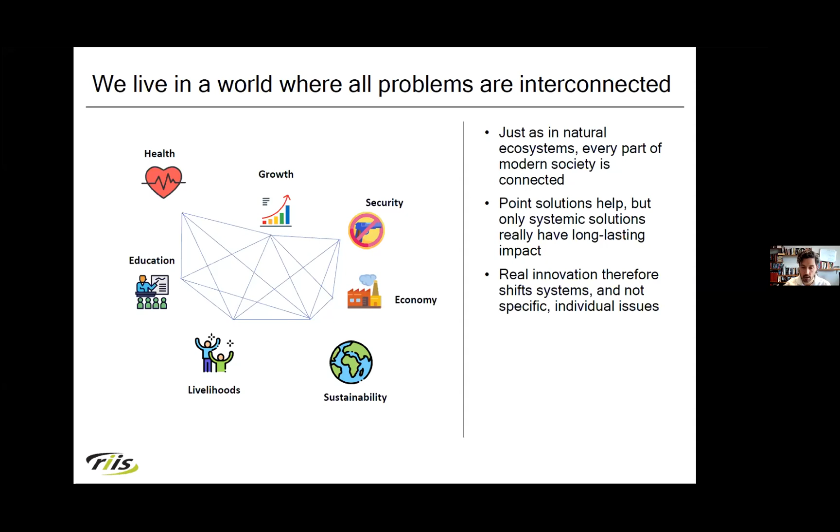Now, one of the challenges that we face when it comes to this question of energy is a kind of triad of problems. As July was saying, we need to balance 3 things. One is there is growth, right? How do we create value for people in South Africa and beyond? And economic growth is very much driven by access to power and access to affordable power. So this is something that we all know. Economic growth, in turn, enables the achievement of better livelihoods.

And it's no surprise, for example, that over the last 25 years, as the well-being and livelihoods of South Africans has increased, that's gone hand in hand with increased access to power, right? It powers education, it powers business, it powers healthcare. And I think one of the things that is sometimes forgotten is that as we move into a kind of fourth industrial revolution, which is a digital technology-driven world, that technology is all based on access to electricity. So the only way that we can continue to achieve this improvement in our well-being and have meaningful positive impact on people is by enabling access to power.

At the same time, we need to balance this with this question of sustainability and ensuring that there is a sustainable, healthy environmental context for the future. And so we have a choice really around where in this triangle we can position ourselves.

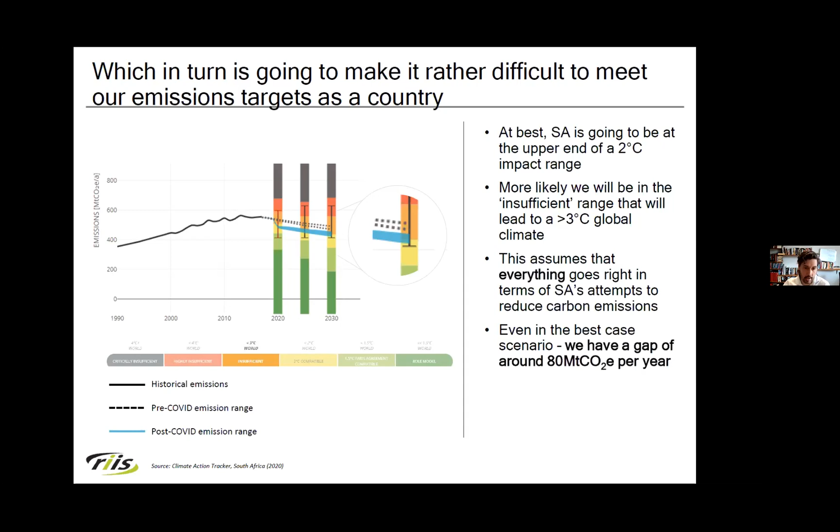So I think one of the first questions to ask is, well, what are the kinds of things that government are doing, and what can be done? So what is the initial effort from the government side? There is quite a lot that's being put forward. The most recent low emission development strategy, produced by the Department of Environment and Energy and issued for consultation at the beginning of this year, really proposed a number of different ideas.

There is a broader wish list, and certainly seeing the economic recovery plan that was recently released by the presidency, there are a number of aspirational wishes about what we want to achieve. There is new hydro capacity of 2,500 megawatts, just shy of 7,000 megawatts of PV, and 16,000 of wind.

There's a range of different energy efficiency programs, many of which have to do with ensuring that the built environment, particularly homes and offices, are much more energy efficient. Mobility programs and the shift towards gas as a fuel source. And then, a range of tax incentives and punitive tax policies, such as the recently imposed carbon tax.

But in as much as there is a wish list for changing this, the reality is that the government has simply not demonstrated a track record of following through on many of these issues. Our history of approving renewable energy is quite low, and given the economic and financial challenges that the country has now and will have over the next couple of years, I think there is a very real question around access to capital, investment capital.

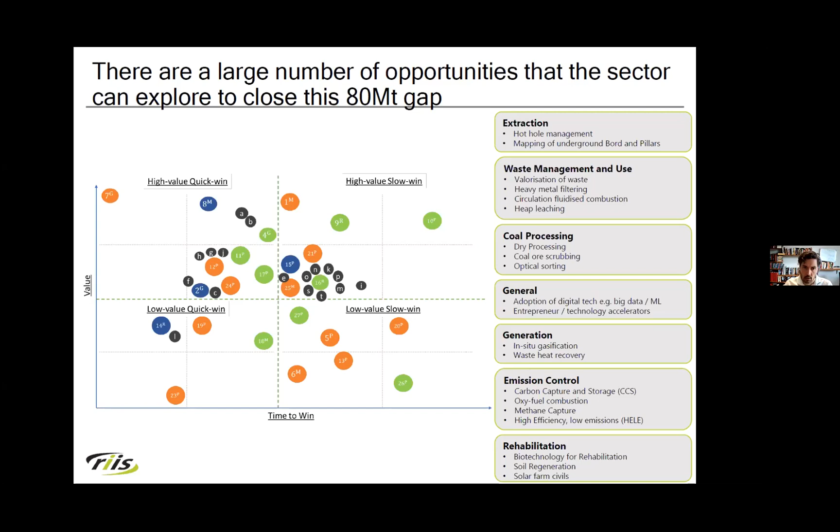So I want to come back then in summary just to this idea of where in the triangle do we want to sit. Certainly the idea that we pursue growth at all costs, at the cost of livelihoods and an environmentally sustainable world, is not something we can pursue.

At the same time, to simply abandon the 53 billion tons of coal sitting in South Africa in pursuit of a 100% green energy mix doesn't make sense, particularly when there are technologies available that would enable us to access that coal more efficiently and cleanly. This really speaks to the point that a diversified energy mix, in which we are constantly investing into newer, more efficient ways of managing our emissions, is really going to be an optimal way of balancing between livelihoods, growth, and sustainability.

So in conclusion, I think there are some large gaps between what we aspire to and what we intend to do — at least 80 megatons of CO2 emissions per year. There are a number of technologies that have been identified that can help close this gap, that can help address not just CO2 but things like water, livelihoods, and a range of other areas.

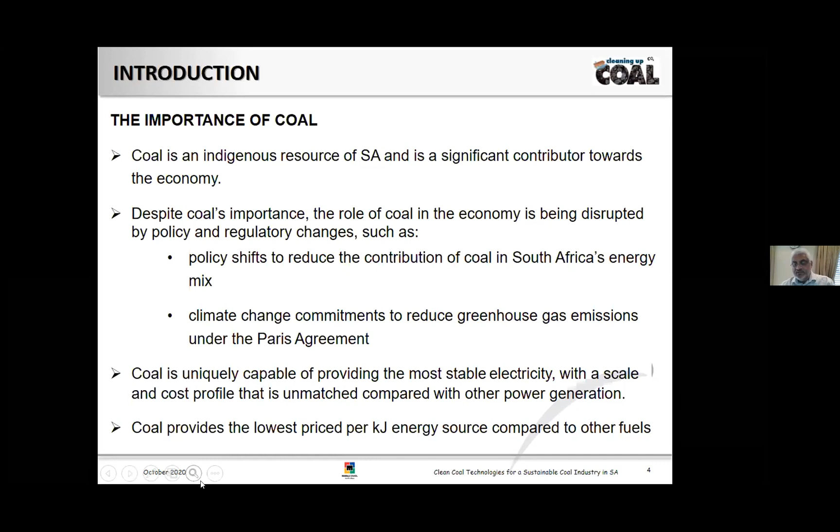Coal is a very complex chemical lattice of carbon, hydrogen, and various elements such as sulfur, nitrogen, mercury, and other trace metals. When combusted, these elements are converted to chemical forms that create pollutants harmful to the environment if not addressed. Extensive research suggests that coal is still crucial for the world and cannot disappear from the energy mix despite being portrayed as a polluting energy source.

Energy and mining companies have been under increasing pressure to curb their emissions. The survival of the coal industry is dependent on promoting the idea of clean coal technology as an energy generation option. So what is clean coal technology?

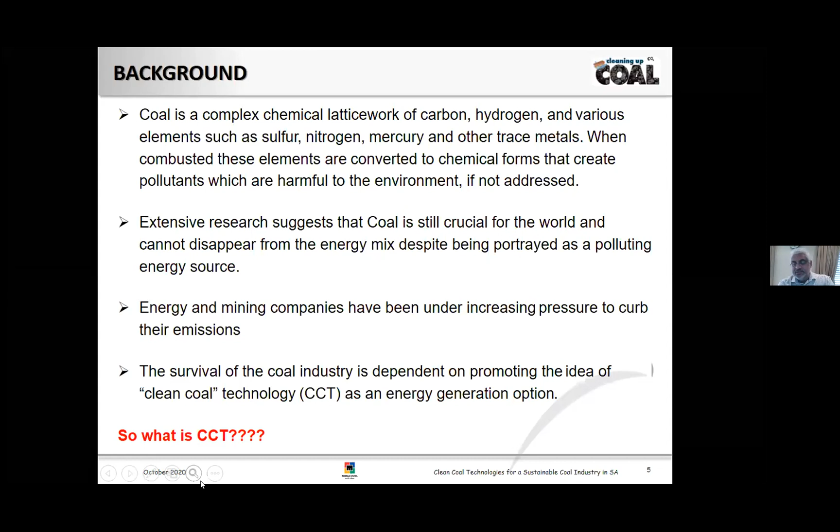Clean coal technology is an umbrella term encompassing a wide array of new generation and advanced technologies designed to enhance both the efficiency and the environmental acceptability of coal in mining, extraction, preparation, and use.

The emissions of concern in the coal value chain are liquid emissions, solid emissions such as ash and waste from coal processing, and gaseous emissions into the atmosphere. Hence, environmental acceptability implies all emissions from the coal value chain that contribute to global climate impacts and health impacts. Due to time constraints, my presentation will concentrate basically on technologies to address gaseous emissions only.

Global warming is not caused by CO2 alone. Rather, global warming is a result of all greenhouse gas emissions. Greenhouse gas emissions is a generic name given for any gas in the atmosphere which absorbs and re-emits heat.

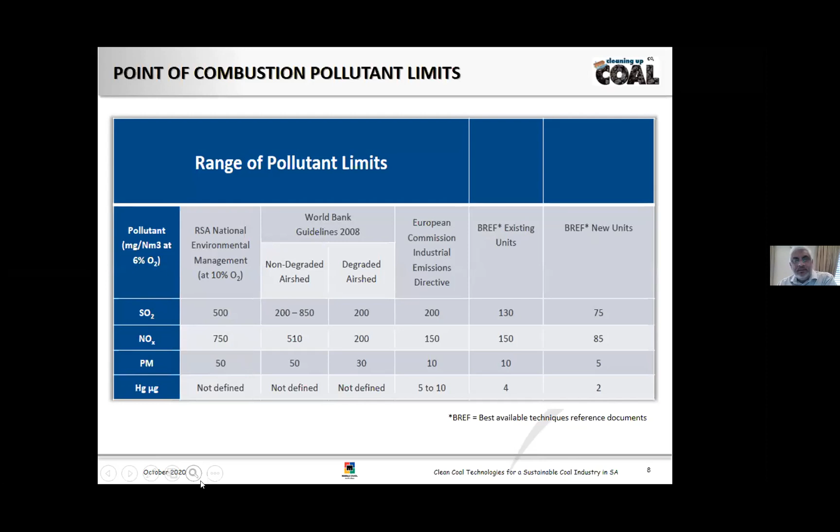The main greenhouse gas emissions of concern are water vapor, carbon dioxide, methane, nitrous oxide, ozone, and fluorinated gases. Note that SO2 is not included in the GHG, but its impact is more health related.

Reading emissions data can be very confusing. Different terms such as greenhouse gases, CO2, CO2 equivalent, and carbon get used in reporting, and at times interchangeably.

Carbon dioxide is a byproduct of the combustion of fossil fuels and living cellular respiration. Carbon dioxide equivalent is a measure used to compare the emissions from various greenhouse gases based upon the global warming potential, reduced to a common base, which is carbon dioxide. For any of the defined greenhouse gases, carbon dioxide equivalent signifies the amount of carbon dioxide which would have the equivalent global warming impact.

Carbon is a chemical element which is present in many gases and compounds. CO2 is not equal to CO2 equivalent, and is not equal to carbon.

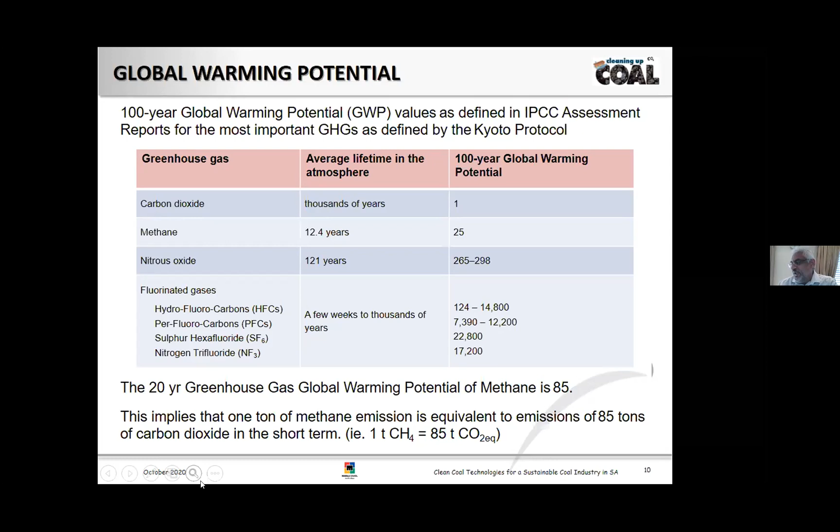Natural gas is widely considered as a viable replacement for coal, as the emission from gas combustion is lower than the emissions from coal at the point of combustion. The drawback with this evaluation is emissions are compared at point of combustion, and only CO2 emissions are taken into consideration. Emissions from smokestacks do not tell the full story.

Concentrating only on point of use emissions will not effectively address climate change, as GHG emissions take place at different stages in the coal value chain, which cumulatively contribute to global climate impact. Each fossil fuel has a different life cycle, and each fossil fuel contributes greenhouse gases at different stages of its life cycle.

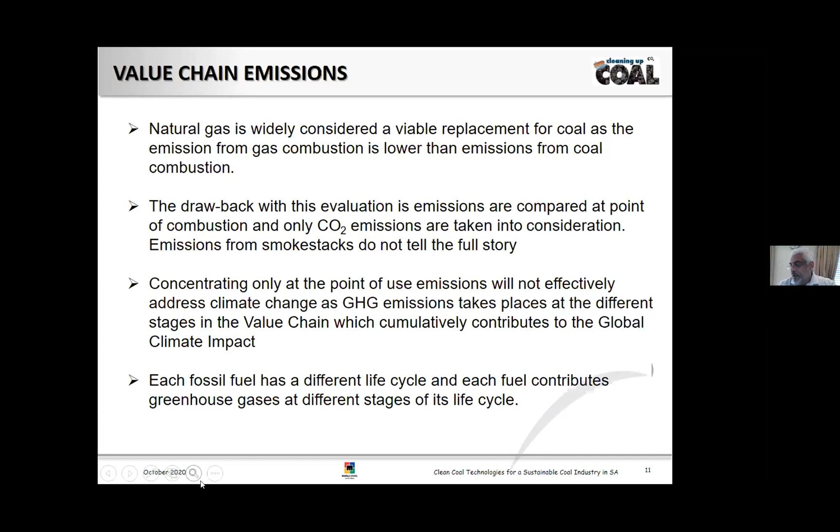If you look at the methane emissions, they are basically due to venting and leaks.

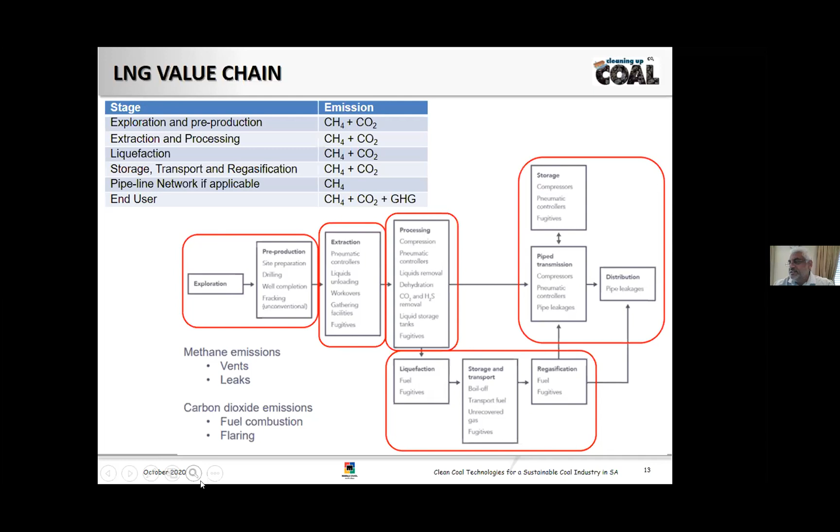We will now look at some technologies that can be used to improve the image of coal.

Climate mitigation interventions pose unique challenges due to the major factors influencing the selection of energy sources, which are energy availability, economics, affordability, and lastly, environmental considerations. Again, to reiterate, GHGs are not emitted only at the point of use. There is a lack of understanding of what contributes to GHG emissions and a lack of awareness of the technologies available for addressing emissions in the coal value chain.

CCTs are perceived to be costly and energy intensive, and hence advocates of renewables believe that fossil fuels should be removed from the energy mix. Coal is competing against gas and renewables for survival, and therefore will require a different way of thinking to enhance its productivity and address climate change concerns simultaneously.

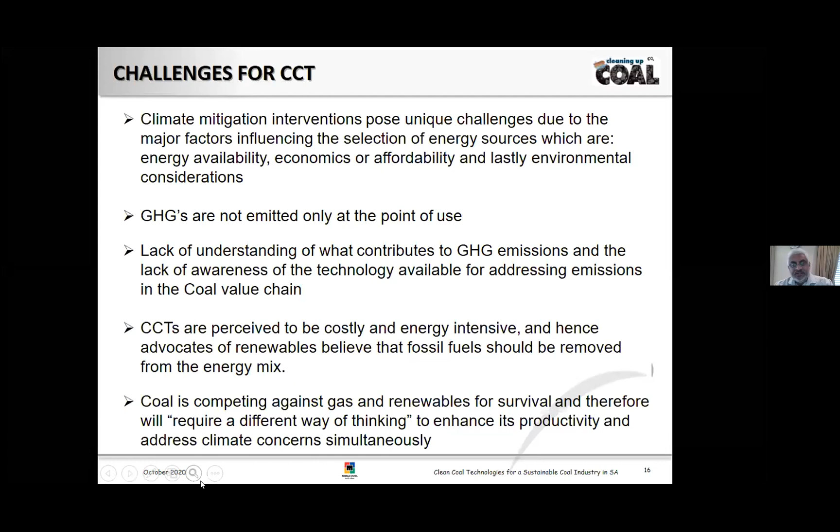To contribute to climate change mitigation, we look at the CCT processes for coal life cycle stages.

Let us look at the first stage of coal mining. Coals are highly heterogeneous and vary widely in quality from mine to mine and even from seam to seam. Coal is normally associated with ash-forming minerals, including sand, rock, and chemical materials, for example organic sulfur, nitrogen, and some mineral salts. Some mineral salts are intermixed in the coal seam or bound organically to the coal, and some are introduced by the mining process.

The cleaner coal technologies that can be employed in the mining process are operational efficiencies through enhanced mining methods, optimal reserve recovery using advanced extraction methods, methane gas capture, and underground coal gasification.

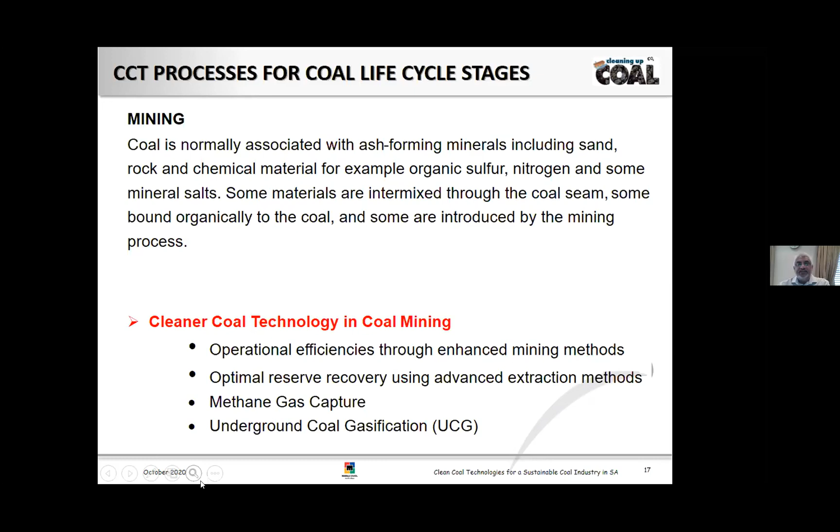Underground coal gasification is an industrial process which converts coal into a product gas. UCG is an in situ gasification process carried out in non-mineable coal seams using injection of oxidants and steam. The predominant gases produced are methane, hydrogen, carbon monoxide, and carbon dioxide.

The cleaner coal technologies in the coal preparation stages could be coal cleaning or coal washing and beneficiation, ultra clean coal, dry waterless cleaning technologies, and coal dehydration technologies.

Coal cleaning and washing at a mine or at the power plant removes ash, rock, and moisture from coal to the extent possible. It reduces emissions of ash and gas emissions such as SOx, NOx, and other byproducts of combustion when the coal is burned.

Ultra clean coal technologies reduce sulfur to a very low level. Also, consistent quality will facilitate stable plant operation and better operating efficiencies.

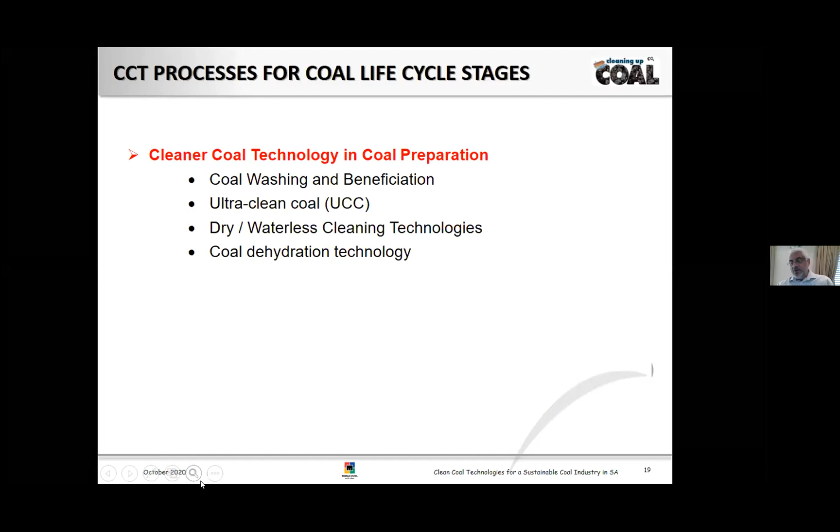Dry cleaning methods such as gravity separators, air tables, and air jigs can also be used when wet washing is not suitable or when washing plants are considered not economically feasible.

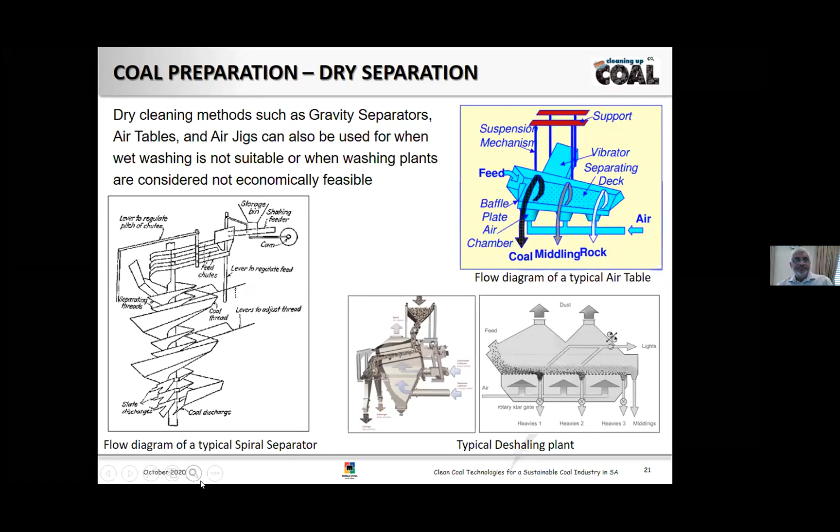Clean Coal Technologies Inc. is developing the first economically viable and scalable coal dehydration technology that creates stable dust-free coal. This technology puts low quality coal through a mild gasification process, removing moisture. Low moisture content improves combustion efficiency.

Clean coal technologies focus on advanced generation and clean coal technologies to advance efficiencies. Improved efficiency increases the power output for a given unit of coal resource. More efficient coal combustion technologies reduce emissions of CO2 and pollutants such as NOx, SOx, and particulates.

Cleaner coal technologies used during combustion include HELE technologies, fluidized bed combustion, integrated gasification combined cycle, pulverized coal, supercritical and ultra supercritical boilers, oxy-fuel combustion, chemical looping combustion, carbonate looping combustion, NOx control processes, advanced control systems, and supercritical CO2-based power generation.

Circulating fluidized bed combustion power generation is considered to be one of the most suitable clean coal technology solutions, as it is the most efficient method to address escalating environmental constraints. It has low NOx capability and furnace sorbent injection for SO2 removal. Also, CFB technology tolerates a wide fuel flexibility and quality variation in the fuel source.

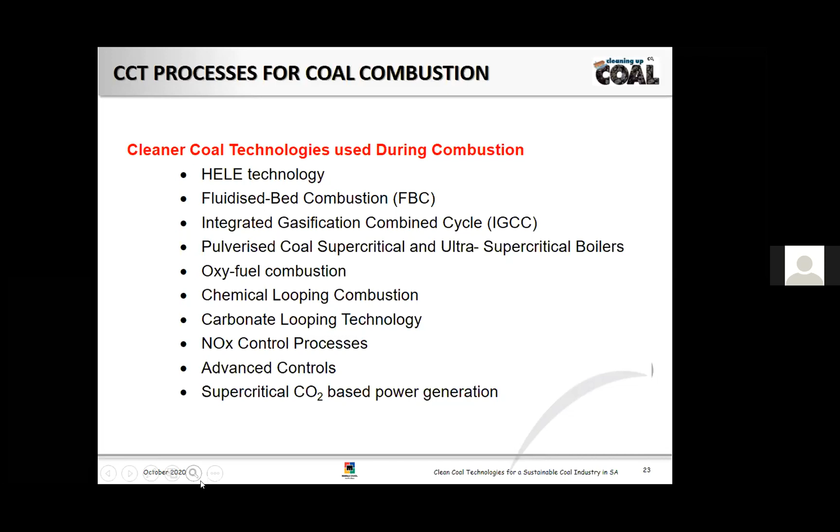We seem to have run into a technical problem. Kirsten, is it possible to sort us out, or is Vinesh back? Yeah, he seemed to have dropped off. Maybe he had an internet connection issue, but I see he's back, so he'll just need to continue. Yeah, you can continue, Vinesh. You can just reshare your screen and continue.

Boiler efficiency is improved from an average of 33% for subcritical technology to 41% for supercritical, 45% for ultra supercritical, and up to 50% for advanced ultra supercritical technology. With the advancement in technology, there is a huge potential for lower emissions through improved efficiencies.

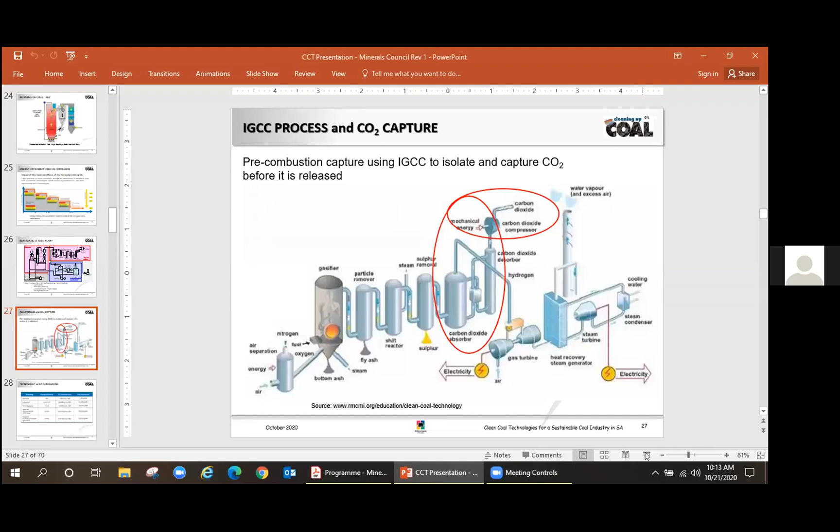So, Vinesh, your slides are not showing. Oh. No, don't seem to be getting back on your screen. Let me try again. Thanks. Go to the slides and go into presentation mode.

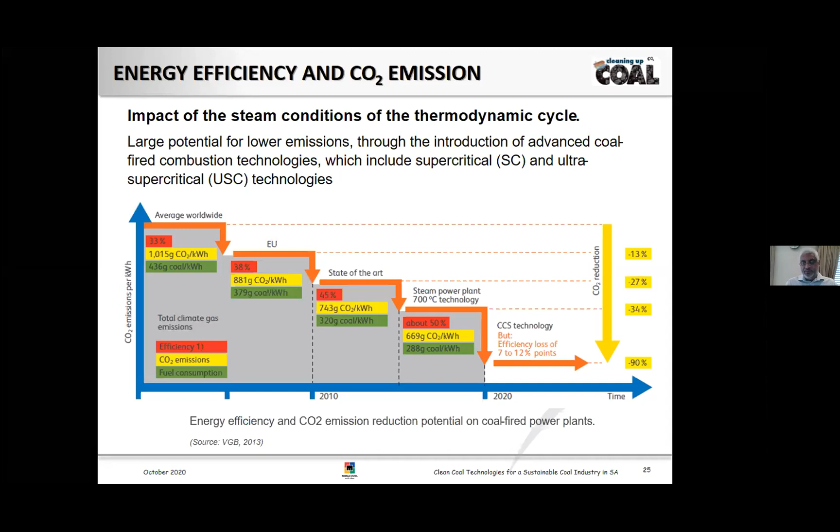This is a schematic diagram of an IGCC plant. The IGCC plant consists of four main operating units: a gasifier, wet gas cleanup, the combined cycle power plant, and the air separation unit.

In comparison to combustion-based technologies, IGCC offers advantages such as increased efficiency from the combined cycle, can be designed to use a wide range of feedstocks, improved environmental performance, and lower cost of cleanup technologies. The cleanup technologies are more compatible with carbon capture and sequestration technologies. It also has saleable products such as slag, sulfur, gypsum, and clean CO2, which becomes a saleable product.

This slide shows you some of the unit operations using the IGCC technology for carbon capture. The carbon capture takes place in the gas cleanup train for the syngas, which is then routed to the gas turbine in the power generation island.

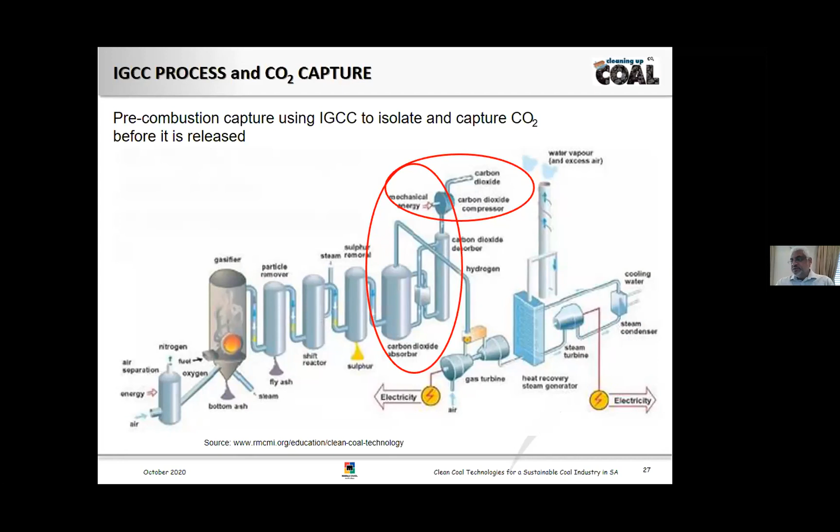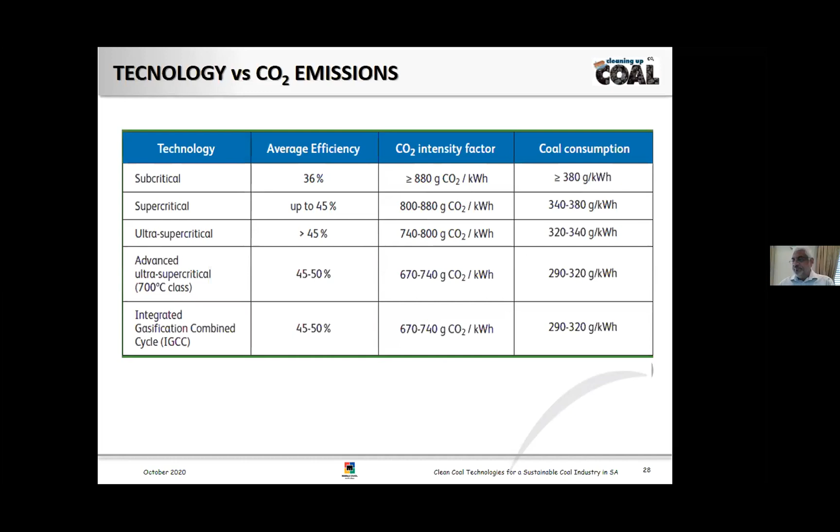NOx reduction technologies that can be used include two types of controls: primary abatement technologies that reduce NOx produced in the primary combustion stage. These reduction technologies are based on the chemistry of NOx formation and focus on minimizing peak combustion temperatures and the residence time at peak temperatures. Low NOx burners allow coal-fired boilers to reduce NOx emissions by 40%.

With the addition of reburning techniques, NOx can be reduced by 70%. Some of the technologies employed for NOx include low excess air combustion, low NOx burners, staged combustion, flue gas recirculation, and NOx reburning.

We look at some of the advanced technologies that are commercially available to reduce CO2 emissions. Oxy-combustion uses pure oxygen in the boiler to significantly increase the concentration of CO2 in the exhaust gas stream, which enables easier CO2 capture. NOx formation is reduced to a minimum because no air is used, hence no nitrogen impacts from the air. Only NOx formation is from the nitrogen compound associated with the coal.

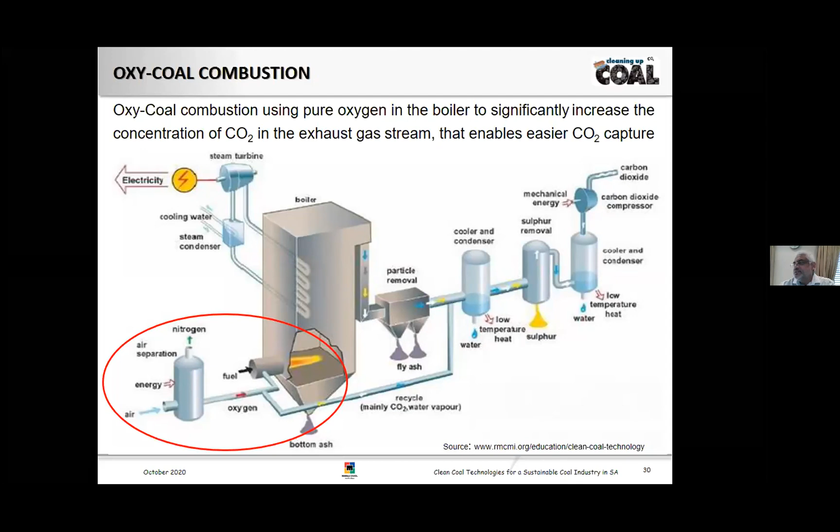Chemical looping combustion is a technological process typically employing a dual fluidized bed system. A metal oxide is employed as a bed material, providing the oxygen for combustion in the fuel reactor, and the spent bed material is routed to the oxidizer, where it is regenerated and sent back to the fuel reactor.

In the carbonate looping process, CO2 is absorbed and captured by lime from the flue gas entering the carbonator. CO2-depleted flue gas leaves the reactor. The converted limestone is transferred to a second reactor, where calcium carbonate is calcined and CO2 is released.

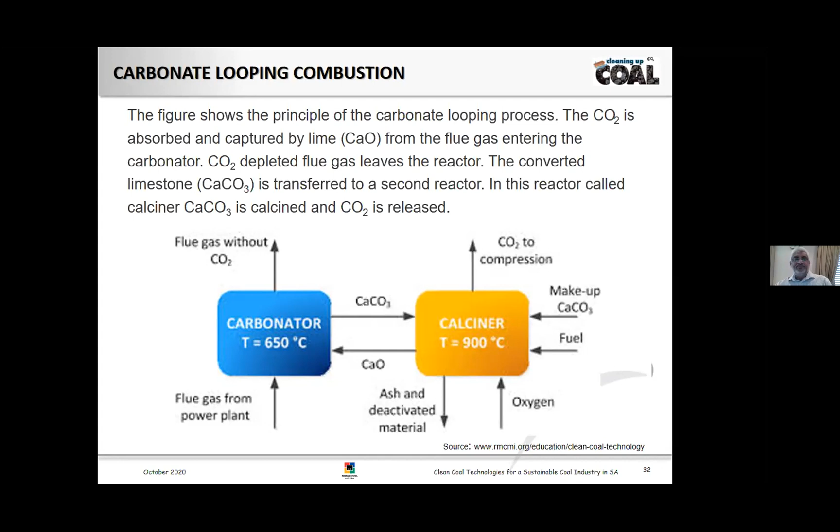A number of technologies have been developed to control particulate and gaseous emissions from coal-fired plants. They include ESPs, fabric filters or baghouses, flue gas desulfurization systems, and NOx control systems. Sorbent injection technology using activated carbon, petroleum coke, zeolites, fly ash, and chemically treated carbons are used to remove mercury. Sorbents are generally injected upstream of either an ESP or a fabric filter baghouse.

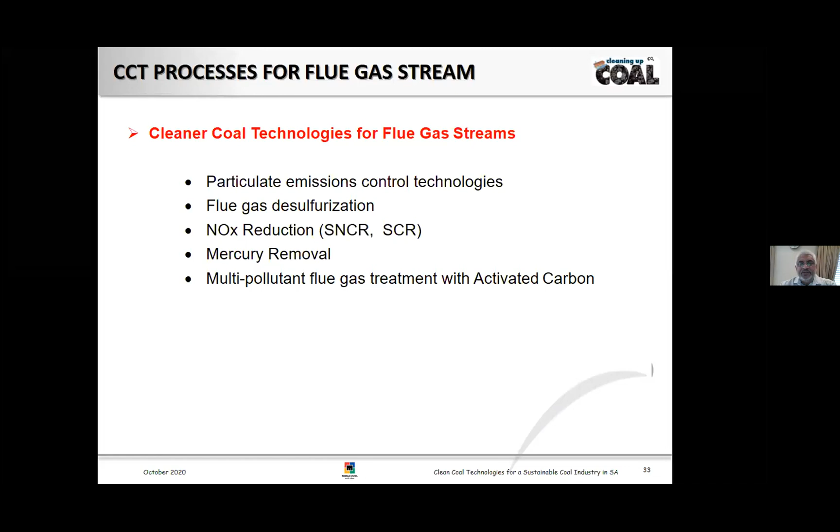Typical technologies for flue gas treatment include particulate emissions control technologies, flue gas desulfurization, NOx reduction using SNCR or SCR, mercury removal, and multi-pollutant gas treatments with activated carbon.

A number of technologies have been developed to control particulate emissions. The dry ESP uses electrodes to place an electric charge on the particles, which are captured on an oppositely charged plate; the particles are then shaken from the plate and collected. A wet ESP is installed after a wet scrubber and uses multiple high voltage fields to attract the particles to an electrode, which are then washed with water.

Two technologies are commercially available to convert NOx to molecular nitrogen or nitrate. SCR, selective catalytic reduction, is the injection of ammonia into the flue gas stream in the presence of a catalyst to reduce NOx to nitrogen and water. SNCR is the injection of ammonia or urea into the gas stream without the use of a catalyst. These technologies can be used separately or in combination.

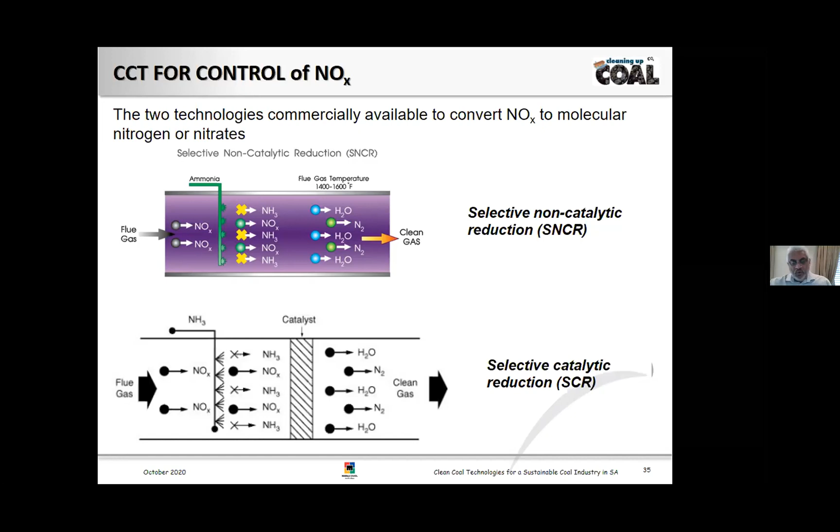Common techniques for SO2 control include wet FGD, dry sorbent injection, and semi-dry systems. Wet flue gas desulfurization is a predominant technology worldwide because of its high efficiency and compatibility with various types of coal. Wet FGD reduces the output of SO2 in the atmosphere by up to 97%, though the reduction depends on the sulfur level in the coal and the extent of reduction. In the process, a limestone and water mixture is injected into the airstream where the SO2 reacts to form gypsum. Wherever limestone is used, there will be additional CO2 emissions from the carbonate.

Dry sorbent injection systems pneumatically inject powdered sorbent into the furnace, the economizer, or downstream air duct. The dry waste product is removed by the particulate control devices. Key elements that impact SO2 removal rates are sorbent reactivity, sorbent to sulfur ratio, flue gas temperature at the sorbent injection point, and degree of mixing between the sorbent and flue gas. Sulfur removal efficiency ranges between 30 and 80%. Dry scrubbing systems have significantly lower capital and operating costs because they are simpler, demand less water, and waste disposal is less complex.

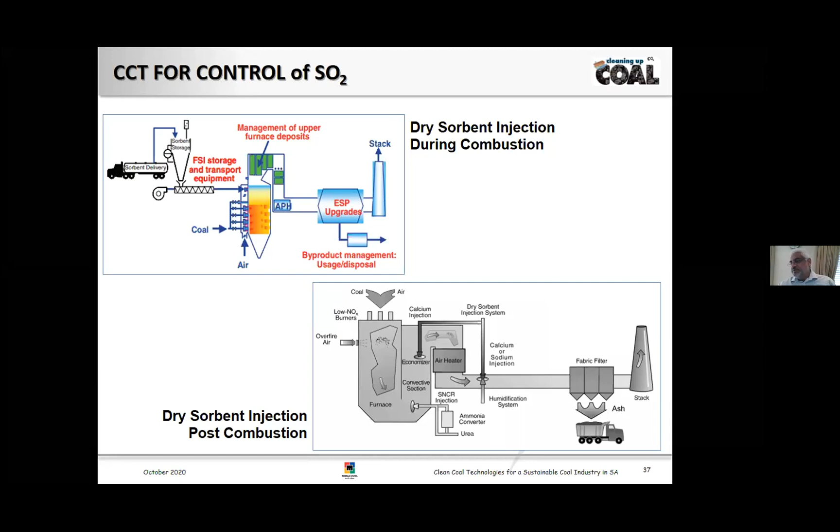Semi-dry systems, or spray dryers, inject an aqueous sorbent slurry or slaked lime reagent into flue gas where it dries as it reacts. Products are dry particles which exit with the flue gas and are collected at the particulate control devices. The aqueous slurry is similar to a wet FGD system, however the slurry has a higher sorbent concentration. Each of the different techniques has distinctive capabilities for emissions control.

More advanced post-combustion sulfur removal solutions that can be employed are Claus processes, to produce elemental sulfur, and SNOX process, to produce sulfuric acid.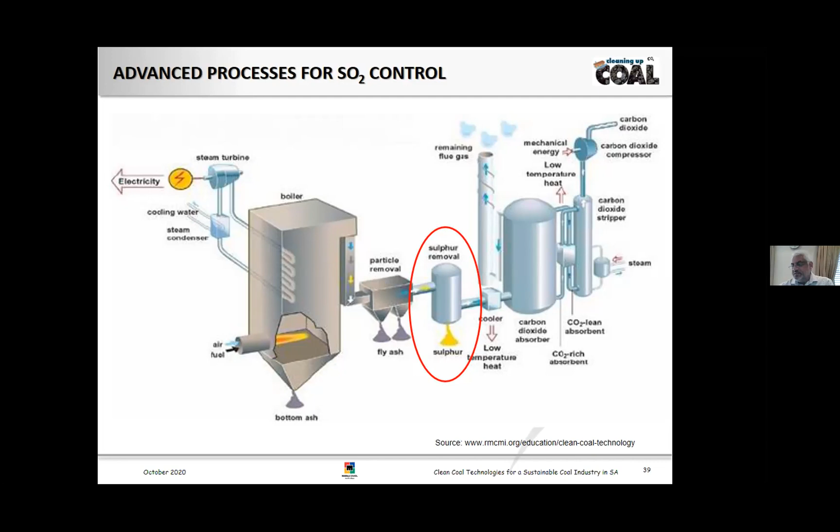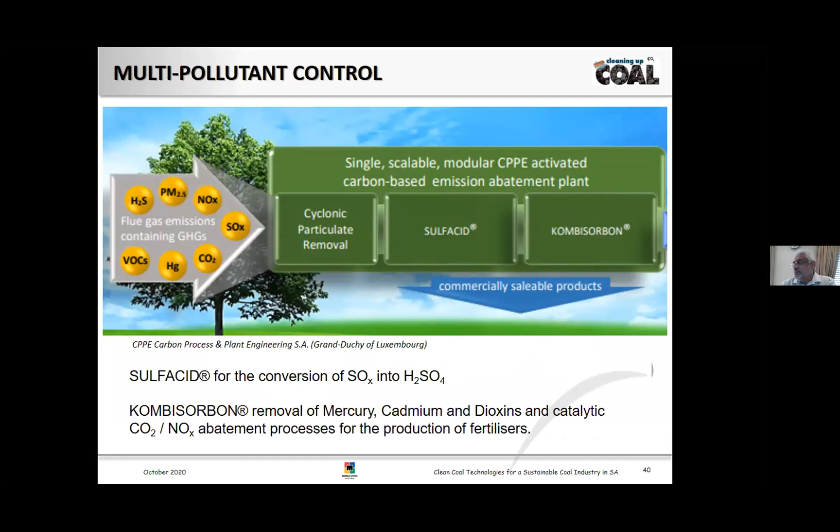More recent developments employ simultaneous multi-pollutant control. One such technology uses activated carbon for the concurrent removal of SOx, NOx, CO2, H2S, heavy metals, dioxins, and furans. Another technology is electrocatalytic oxidation, which consists of a three-stage process. First, the flue gas is led through a gas reactor which oxidizes the pollutants to higher oxides. Then the gas goes through a wet electrostatic precipitator system for collecting products of the oxidation process and other fine particles. Finally, the effluent is treated to recover valuable byproducts, for example sulfuric acid and nitric acid.

The need to tackle rising CO2 emissions to address climate change means that CCT, or clean coal technologies, now extends to include carbon capture utilization and storage, combined heat and power processes, and hybrid solutions. Some of the techniques are carbon capture and storage, carbon capture and utilization, combined heat and power processes, energy capture from waste heat sources using technologies such as ORC and chilling, and hybrid solutions. These can be complex solutions combining several technologies to achieve environmental goals.

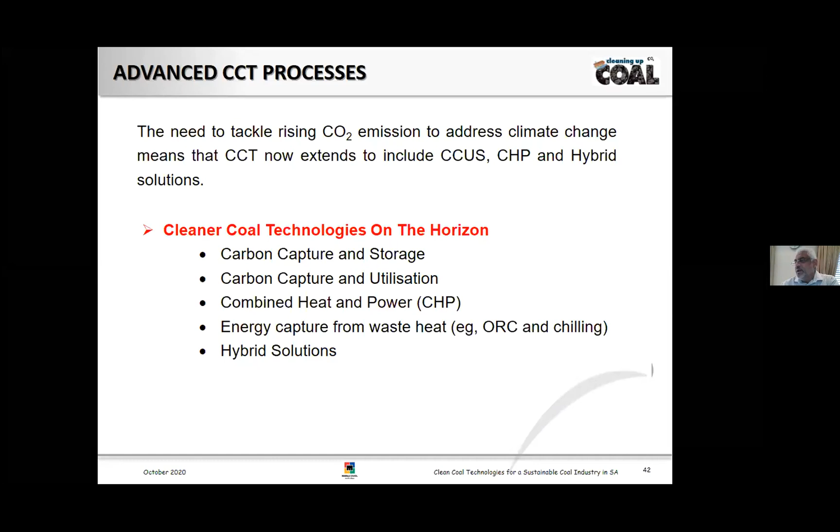Coal can also be used in collaboration with renewable energy, which ensures the reduction of CO2 and greenhouse gas emissions. Solar power can support the thermal aspects for steam raising in the coal-fired power station. Coal can also be co-fired with biomass and a range of waste materials.

The development and deployment of CCS technology has significant potential to reduce CO2 emissions in energy systems. CCS is a combination of different technologies for capturing waste CO2, usually from large point sources, transporting it to a storage site, and injecting the captured CO2 in a compressed form into a suitable deep geological strata where the CO2 can be safely stored over an extended period.

CCS is also being considered as part of South Africa's energy mix and climate change future. However, some realities for CCS implementation in South Africa: the general geology of South Africa is not suitable for onshore CO2 storage. The CCS value chains will be very complex and have no economic contribution, that is, capture and storage will be a cost burden. South Africa has little opportunity to ultimately store the quantities of CO2 currently being produced.

Several different technologies can be used to capture CO2. They fall into two categories: post-combustion CO2 and pre-combustion CO2.

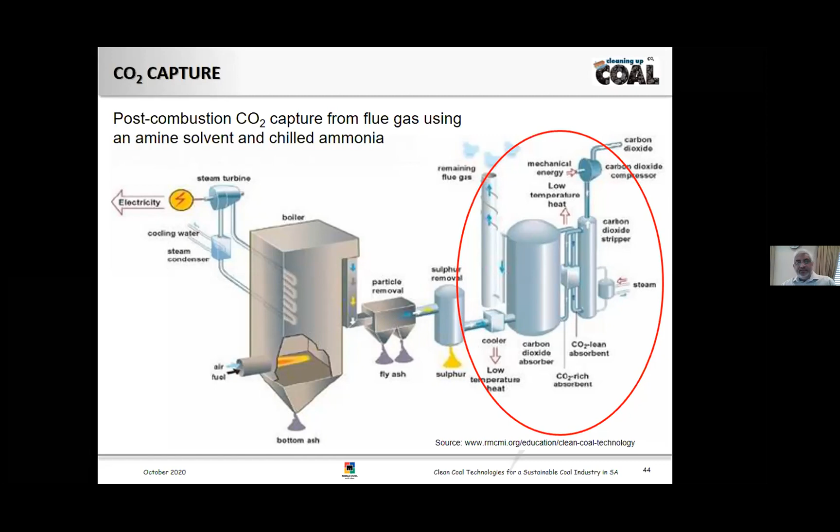Energy efficiency and renewables are often positioned as the only solutions needed to meet climate goals in the energy system, but they are not enough. Without carbon capture and utilization, coal power plants cannot achieve the deep reductions required to avoid substantial contribution to global warming.

Carbon is an input chemical and basic component for numerous processes and economic activities, mainly derived from fossil fuel or fossil-based raw materials. Globally, over 90% of organic chemicals are derived from fossil-based carbon, which contributes roughly 7% of the global demand for crude oil.

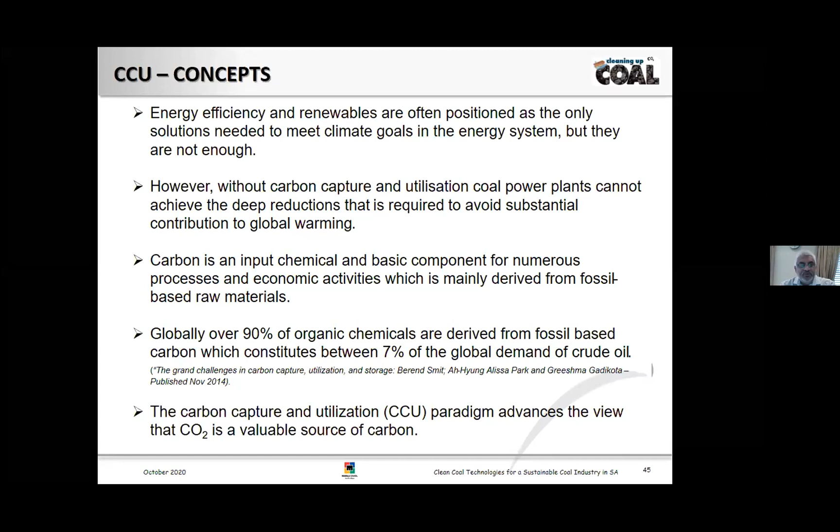The carbon capture and CCU paradigm advances the view that CO2 is a valuable source of carbon.

Some carbon utilization pathways can be differentiated into two main groups: the conversion route and the non-conversion route. In the non-conversion route, captured carbon can be used directly in processes such as enhanced oil recovery, beverage carbonation, food processing, welding, or as a cleaning agent or solvent.

In the utilization pathway, they can be differentiated into two different main groups. In the conversion route, the carbon from the CO2 is reacted with other reagents to form fine chemicals, or converted with hydrogen to form hydrocarbons or simple alcohols such as methanol, or further converted into fuels.

The fuel pathway has the potential to provide the most meaningful impact on carbon emissions, with the production of methane, methanol, and DME.

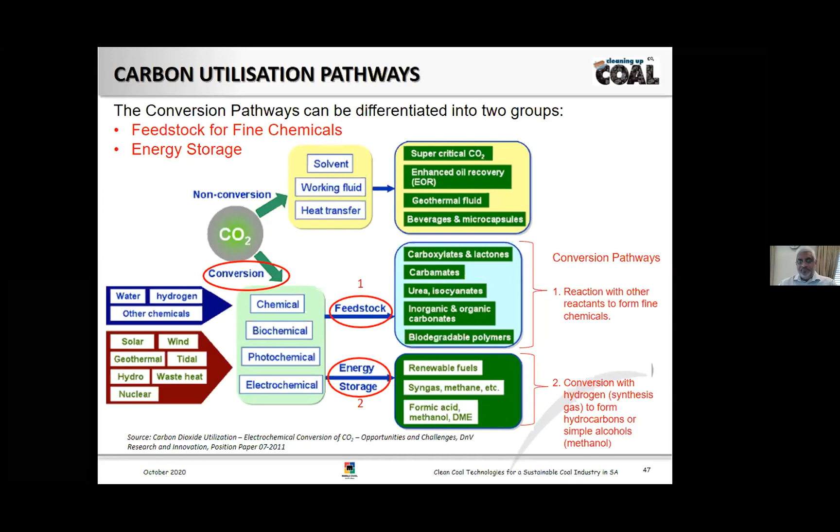End-of-pipeline pollution abatement technologies integrated with CCU technologies have the potential to achieve climate change mitigation and kickstart an energy revolution.

I am presently undertaking a study into practical pathways to utilize recycled carbon from the primary processes of fossil fuel conversion and industrial processes, focusing on the fuel pathway.

The biggest challenge is not to shift the environmental burden from one life stage to another.

Based on these considerations, two different scenarios, one for an ultra supercritical power plant and one for an IGCC plant, demonstrate the integration opportunities for clean coal technologies.

The block diagram is part of a solution for CO2 utilization in the fuel pathway. Integrating clean coal technologies and energy efficiency technologies is an important consideration.

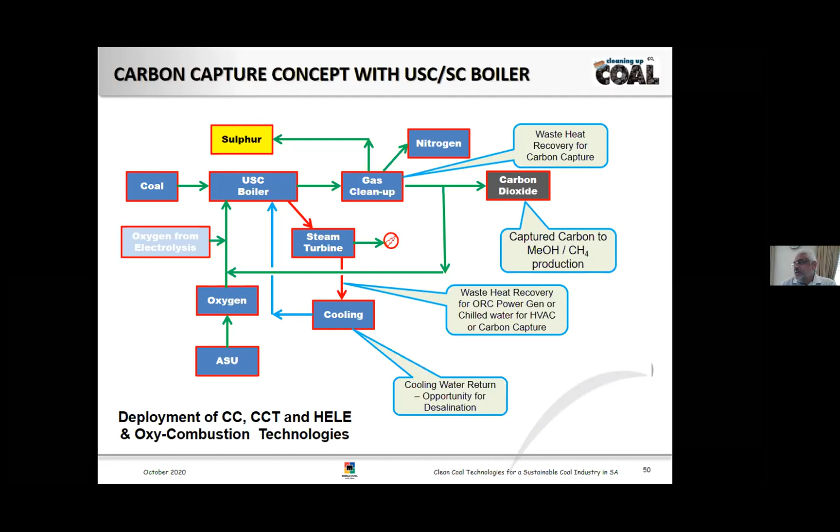When designing an energy system, the relevance of these ideas and innovations has to be assessed on a case-by-case basis.

Power generation efficiency is influenced by a number of factors and operating parameters, including coal type and quality, steam temperature and pressure, boiler design and technology, type of combustion system, condenser cooling water temperature, location, industrial symbiosis, and industrial clustering.

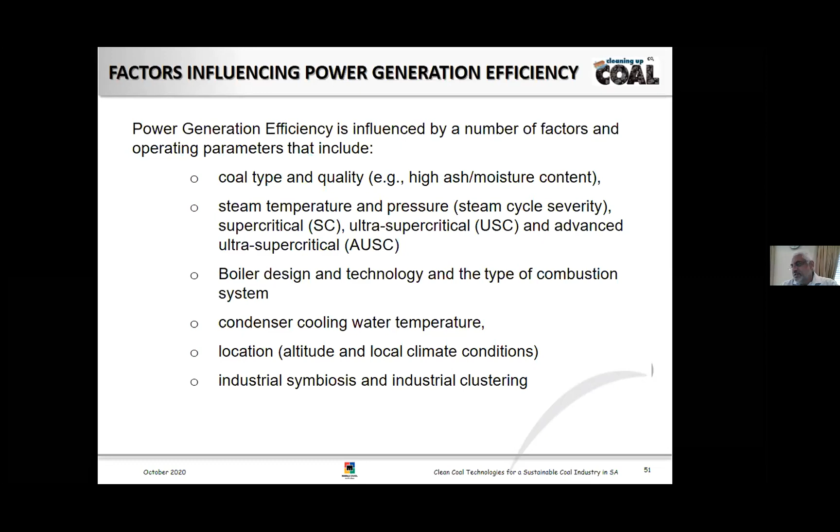Operating at altitude and prevailing ambient conditions have a negative impact on efficiency. Thermal power generation at coastal regions utilizing wet cooling technology will provide electricity most efficiently.

There is between 3 and 5% energy improvement compared to a plant at higher altitudes utilizing dry cooling technology for identical power generating capacities. Additionally, generating power close to load centers will reduce transmission losses and assist with balancing the power grid. The combined effect of better generating efficiency, lower transmission losses, and generation close to the point of consumption will conservatively reduce net carbon emissions footprints by between 120 and 150 kilograms of CO2 per megawatt hour for a coastal installation.

Hybrid thermal power generation technologies will provide electricity with a comparatively lower emissions profile. The average CO2 at the point of generation for an Eskom fleet is around 1 ton per megawatt hour, compared to around 700 kilograms per megawatt hour for hybrid technology.

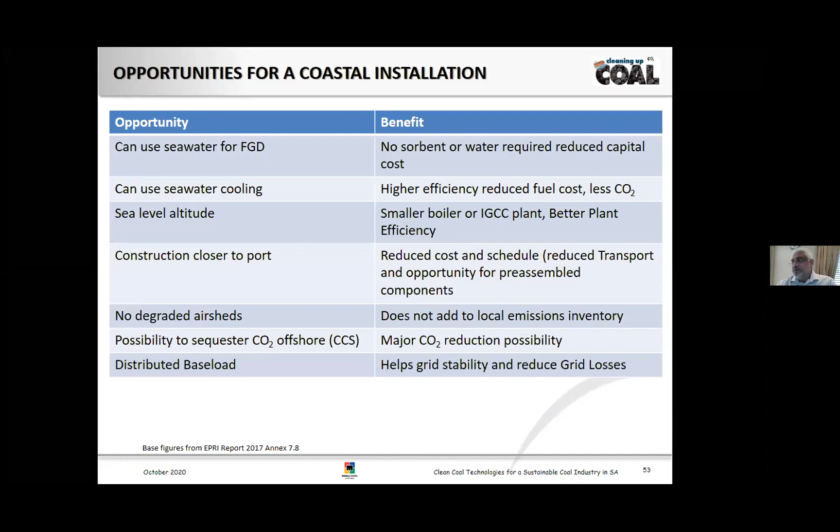Okay, I'll skip the slide, but there are huge advantages for a coastal installation compared to an inland installation. If you look at the financial benefit of a coastal installation, definitely there are advantages, and the LCOE for inland is roughly 1,467 rand per megawatt hour compared to 1,400 for the coastal installation.

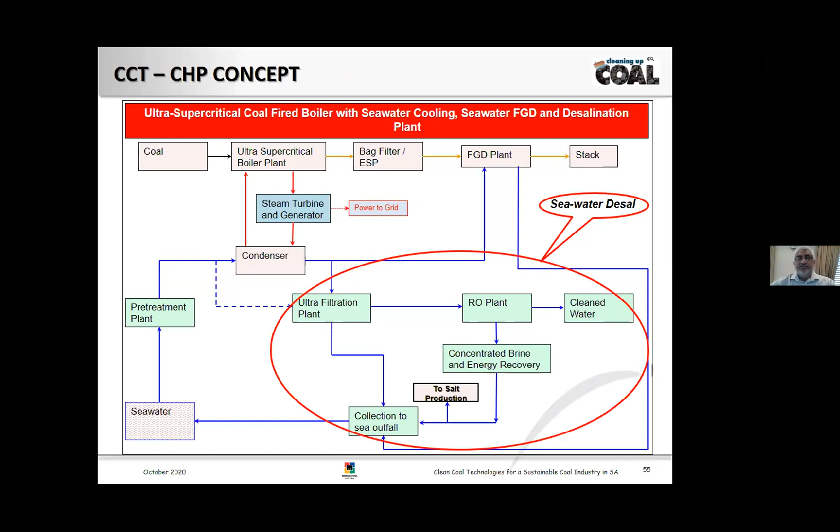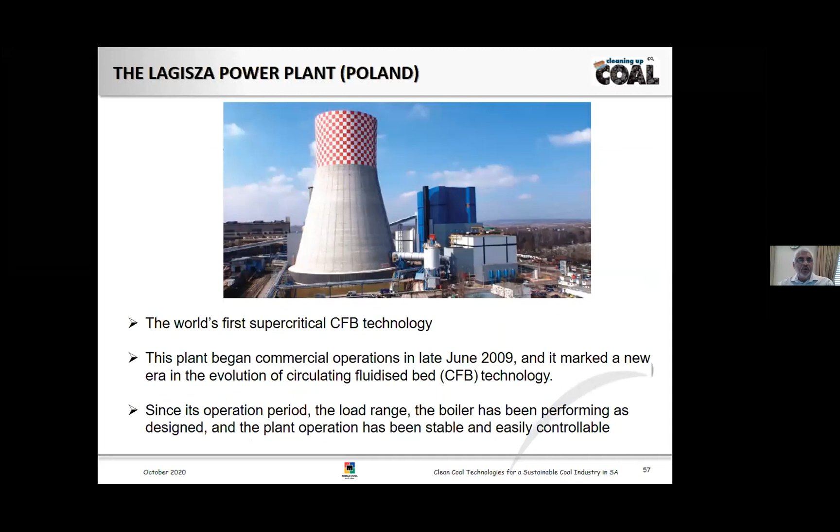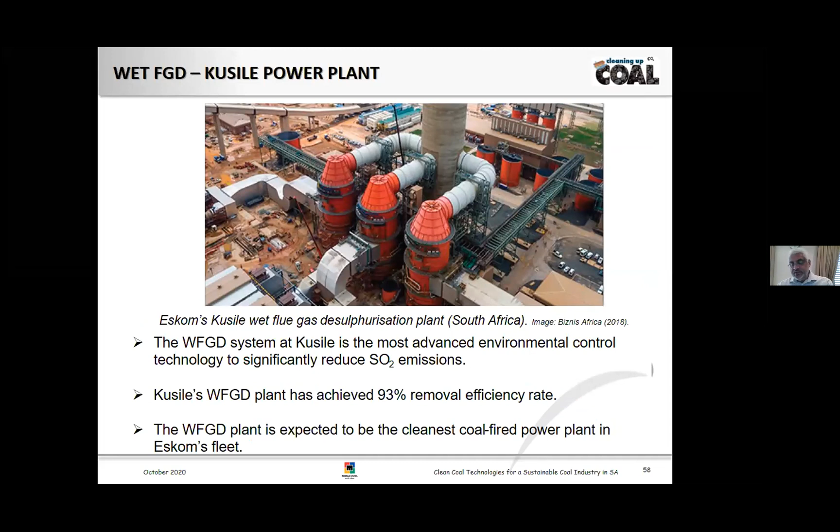One of these is a plant in Poland, a supercritical CFB technology which is operational. The Kusile power plant with its wet FGD reaches removal efficiencies of up to 93%. There are also ultra supercritical applications in China, and an IGCC demonstration plant in Japan with designs now reaching 540 megawatts per IGCC plant.

In concluding, coal has suffered setbacks owing to environmental policies and market distortions. The focus of cleaner coal technologies is on addressing emissions rather than getting rid of a fuel. The implementation of CCT technologies is a solution to the continued use of coal.

HELE technology and efficiency improvement concepts facilitate the quickest pathway to CO2 reduction. Research projects are the best way to determine which technologies are fit for purpose and implementable for the qualities of coal used. A holistic approach must be used for effective climate mitigation solutions because emissions do not occur at the smokestack only. We must identify demonstration projects and prove the potential of CCT through government and industry partnerships.

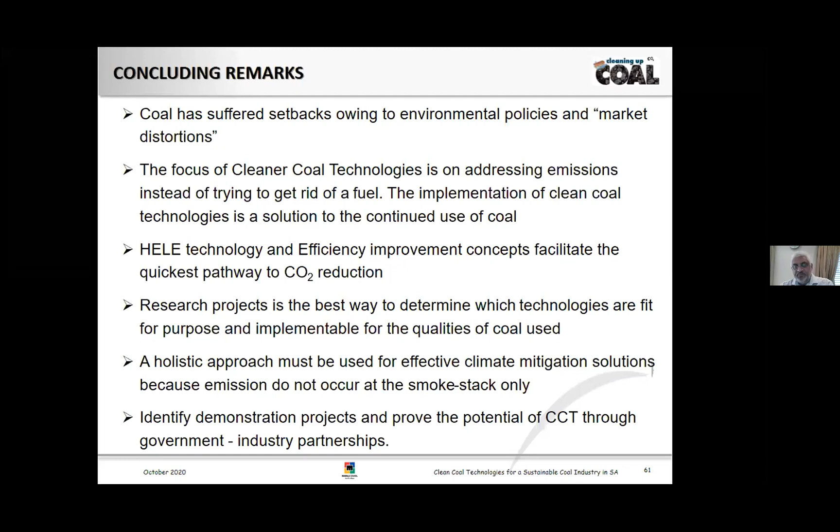Thank you very much, Vinesh. Thanks very much, I think you have actually made the case for collaboration. And I also see in some of the comments people are actually advocating for collaboration between the private sector and the public sector in terms of advancing the clean coal technology options.

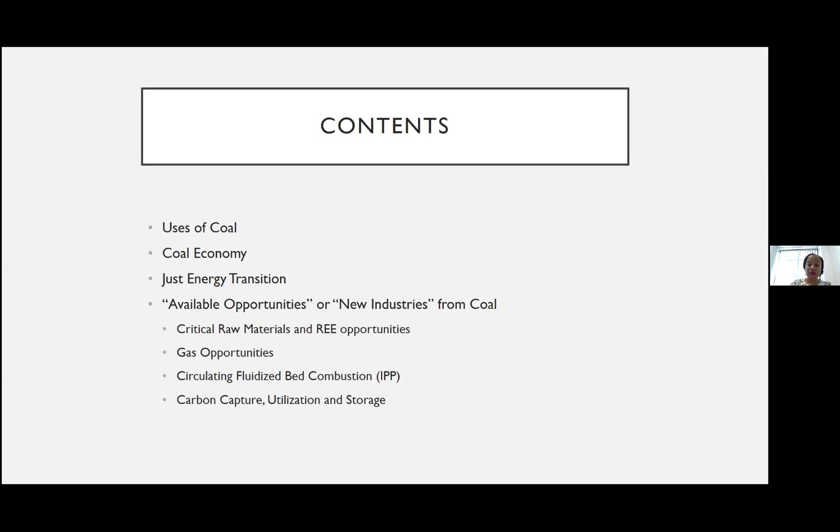As we all know, coal has got various uses. Coal is used in electricity production, steel production, cement industry, paper and aluminium, as well as chemical and pharmaceutical, and coal to liquid, as well as coal to gas for synfuels, as well as in plant fertilizers.

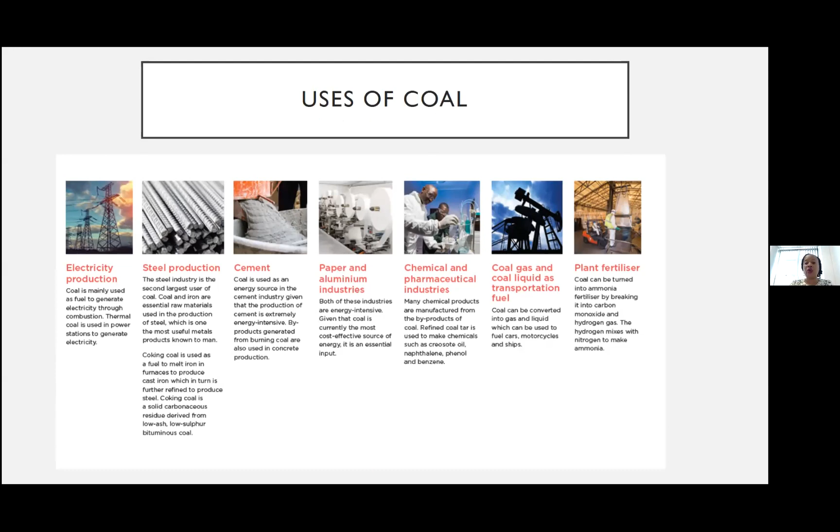What is the current economic landscape of coal in South Africa? As Mr. July has said, in 2019 the country managed to produce 258.5 million tons of coal, which was valued at 141.1 billion rand, and that amounted to 94,297 direct employment in the mining sector. Currently, coal is the second largest employer in the mining sector.

The local sales, meaning domestic sales for coal, amounted to 194 million tons per annum, valued at 86 billion rand. Of that 194 million tons per annum of local sales, 120 million tons was for Eskom, for electricity generation, 42 million tons was for Sasol, your synfuels and other products, and 34 million tons was for other uses, which is your fertilizers, your cement industry, as well as your metallurgical industry.

And as we all know, currently almost 85% of the country's electricity supply is from coal, which has got a value of 177 billion rand, and that has direct employment of 48,622 jobs at Eskom. Below, as you can see, these are just the final value-added products that can be attained from coal, or that are produced from coal, which mostly are from your Sasol processes.

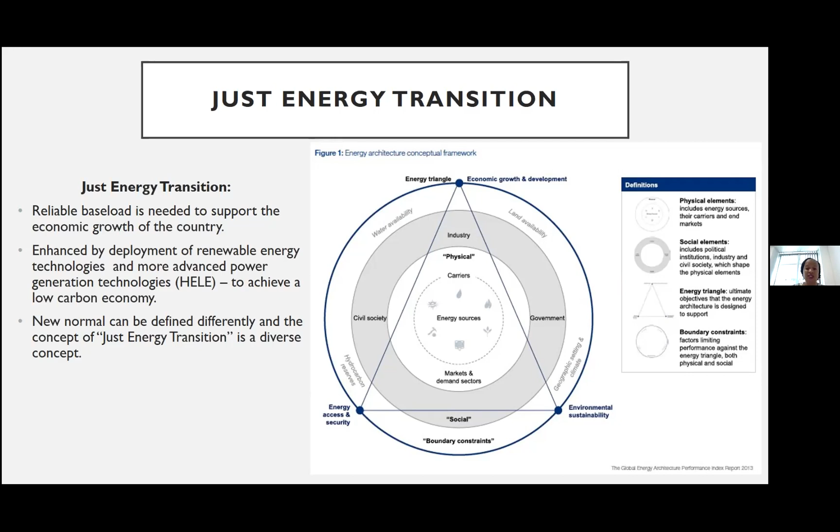So managing the energy transition, how do we go about doing this? The just energy transition, as I've said, is not a fixed set of rules, but a vision and process based on a dialogue between our social elements - your governments, your civil society, as well as the industry or the investors. So analysis of the impact of energy transition is very crucial, more especially on jobs and economic development of the country. So the country's aim for a green economy should make sure it eradicates or reduces poverty in the coal hub provinces.

The question that one needs to ask: what will determine if SA is ready for energy transition, or how far are we, are we there yet? So our just energy transition readiness is actually determined by 4 indicators, and those are your social, political - meaning your regulation - economy, as well as your technology.

When looking at the social impact or social elements, you look at public awareness and acceptance of just energy transition - meaning, in South Africa, are we there yet in terms of accepting just energy transition? Secondly, under social, we also need to look at human capital, which is the type of education that we have, the type of health that we have - all the social impacts that contribute to a good society. These should also be taken into consideration when looking at the social elements.

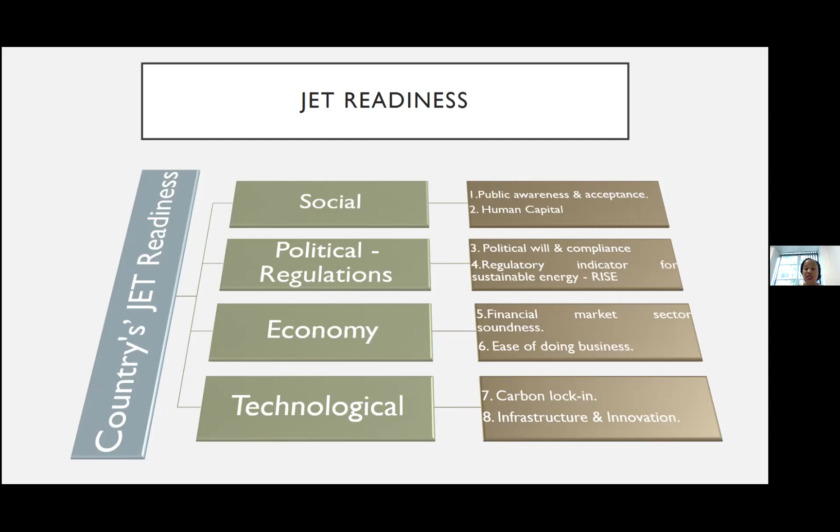Then the future of coal in South Africa, moving away from just energy transition. Looking at the political will, we have the IRP 2019. Currently, South Africa contributes 2% of the world's coal fleet, making it the 15th country as a CO2 emitter.

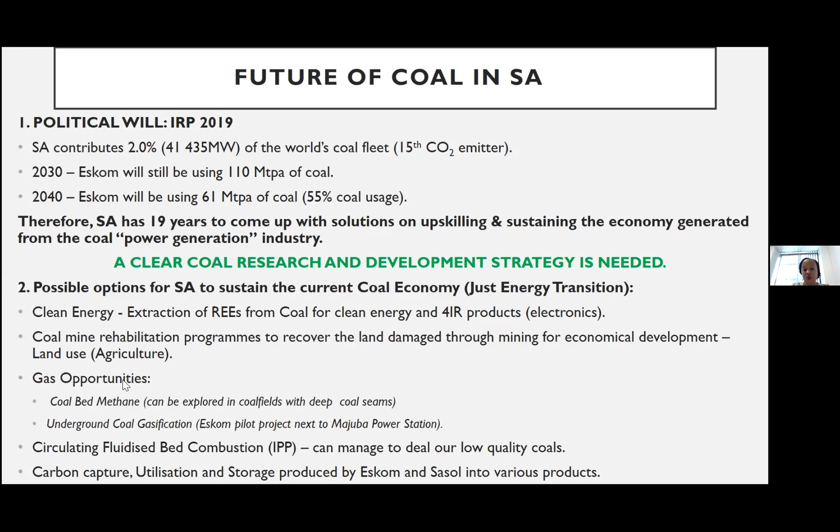We can also look at CFB, circulating fluidized bed combustion, which can deal with our low quality coals. Lastly, we have a project in the country for carbon capture, utilization, and storage, which can use the CO2 produced by Eskom as well as Sasol and convert it into various products if we cannot store it.

So looking at the first opportunity, which is critical raw materials and rare earth elements opportunities. Currently I'm doing research studies on critical raw materials and rare earth elements opportunities in the country in collaboration with UJ. I've got postgrad students that started last year trying to map where we can extract or source CRMs as well as REE, and on what type of coal we can do this. So what is CRMs?

CRMs are metals and minerals which are of high economic importance to a particular industry, sector or spatial area, and are at risk of supply shortage. Currently in South Africa, we are mining rare earth elements, but not in huge volumes. The issue with rare earth elements, and the reason why we're not mining them in huge volumes, is because there are still challenges in how we can process rare earth elements from the ore.

Another option is to source these rare earth elements or critical raw materials from coal and coal fly ash, as well as acid mine drainage. By doing this, we're also trying to rehabilitate the land from coal fly ash and coal mine dumps, trying to rehabilitate and source out new commodities from such.

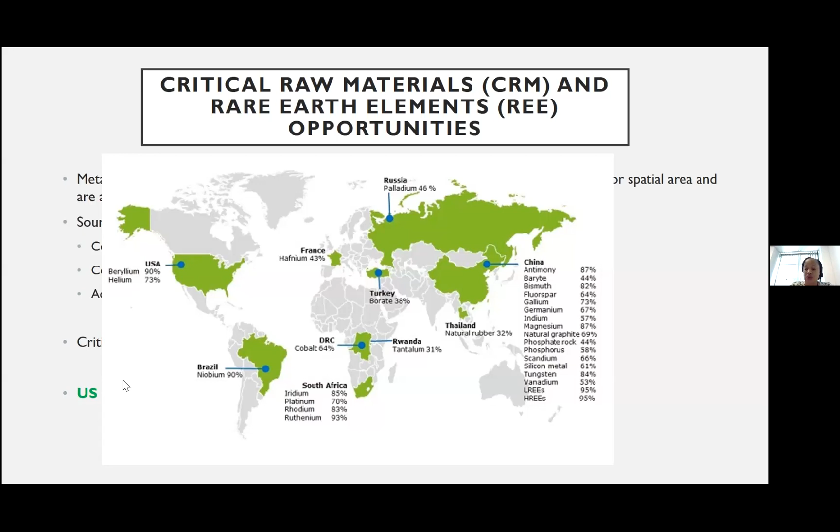Looking at the global distribution of rare earth elements, in South Africa we've got less than, I think, 10 mines that produce rare earth elements. But the critical challenge with the extraction of rare earth elements from the ore is the processing side, where we need R&D, research and development opportunities that will enable us to process rare earth elements from ore, as well as extraction of rare earth elements from coal.

So if we extract rare earth elements, what products can we actually be able to generate or produce from these? Firstly, there are only 17 rare earth elements.

You've got your light rare earth elements and your heavy rare earth elements. Your light rare earth elements can be extracted and are useful in applications like electronics, light bulbs, optics, cordless power tools, wind turbines for green energy, as well as in the automotive catalyst sector.

Looking at US rare earth elements usage: the US currently uses rare earth elements mainly in the catalyst sector, with 62% used in this catalytic sector. 13% is used in the metallurgical industry, 9% in glass polishing and ceramics, 7% in magnets, 3% in the phosphors industry, and 6% in wastewater treatment or radiation monitoring.

The US, as well as Europe and China, have a collaborative solution in developing a new industry in critical elements or critical raw materials, as well as rare earth elements in coal-based material. The US government, together with industries, has an annual budget of $23 million up until 2027. This project started in 2018, and the US is far ahead when it comes to rare earth elements extraction or critical elements extraction from coal.

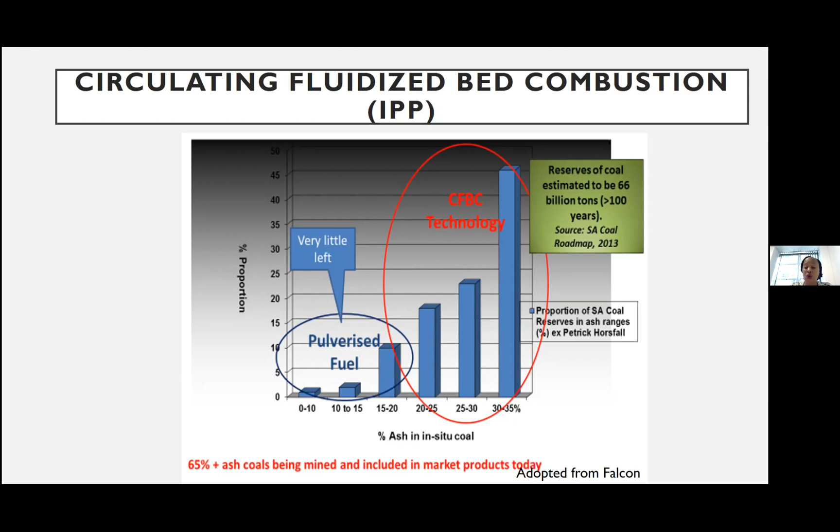And going further, looking at the circulating fluidized bed combustion for IPPs, as we all know the coal quality that we have is very low. It has got high ash content. So what else can we do? Because on the IRP itself, there is still some allocation for building coal power plants, but for IPPs. We can actually look at the circulating fluidized bed technology, as Vinesh has mentioned, which is a technology that will be very suitable for the type of coal that we have in South Africa.

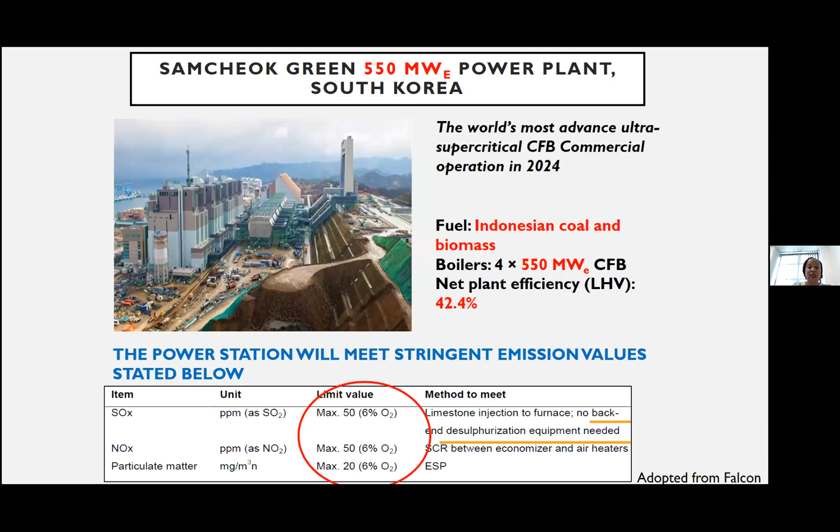And lastly, looking at carbon capture, utilization and storage. Currently, the country has managed to do research studies to look for potential geological storage sites, and they've managed to find 4 sites, some offshore and some onshore, for the storage of CO2 currently produced by Eskom and Sasol. When it comes to capture, I think the technologies we have in the country can actually capture CO2. So the main focus area we are currently embarking on as a country should be the storage as well as utilization.

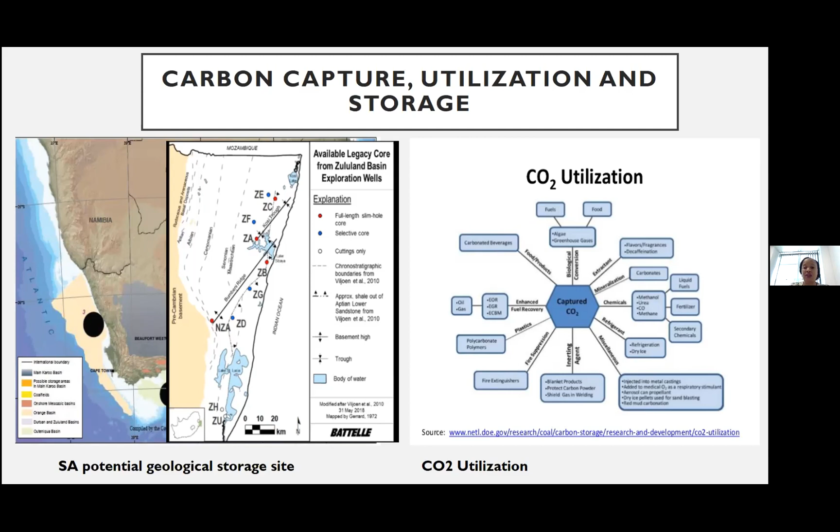But then this needs also a financial muscle from the industry.

And in conclusion, as I've said, just energy transition is a diverse concept which can be interpreted differently depending on which table you sit in. And the coal industry still has almost 2 decades to figure out the strategy towards a coal economy. And raw materials for the green economy can be extracted from coal to reduce the import of primary raw materials for the green economy, your wind turbines as well as your solar.

We can actually extract this from these resources from coal. As you've seen, there's a dynamic link between coal, coal-to-gas, and power technologies. Cleaner coal technologies and gas should be part of a just energy transition for power generation. The coal industry needs to refocus and look at coal beyond power generation, seeing what more industries can be generated from coal, as well as the CO2 captured during coal utilization. Coal economy can still grow if there is a will from the policymakers as well as the investors. I would like to thank you.

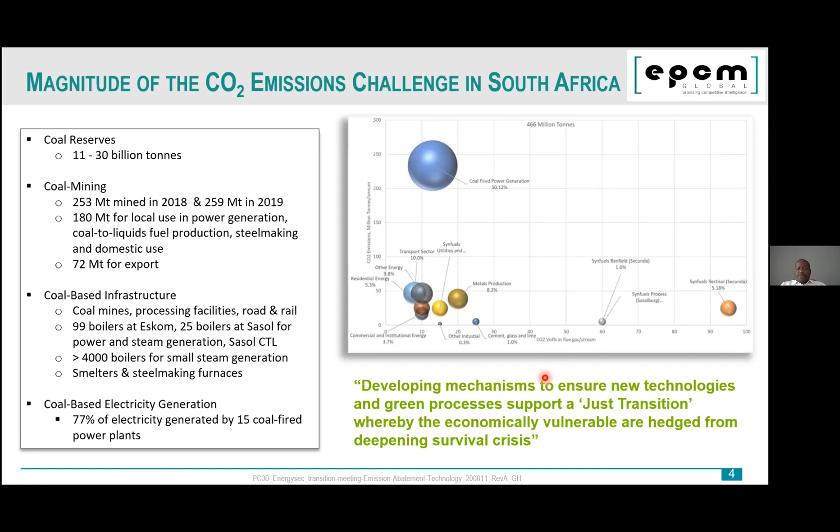So what are the challenges? Even Eskom is struggling with security of supply issues. There's a perception that coal is dirty - yes, it's dirty if it's not managed, it's like any other process, but if managed correctly, it can be clean and used successfully going forward. I heard Nandi speaking of OECD - OECD anticipates that 15% of the world's energy production will still come from coal in 2050. So we must really wear a different hat around the prospects and timeframes involved, and by the time we reach that point, are we market leaders? Are we successful at what we do?

The second thing is that there's a desired future which looks at self-generation, the utilization of coal and discard coal. There is a way you can use discard coal and use it successfully, reach near zero compliance, and really look at merging coal, the primary energy of coal, with renewables to create a new environment. This is how we make coal fit for the future.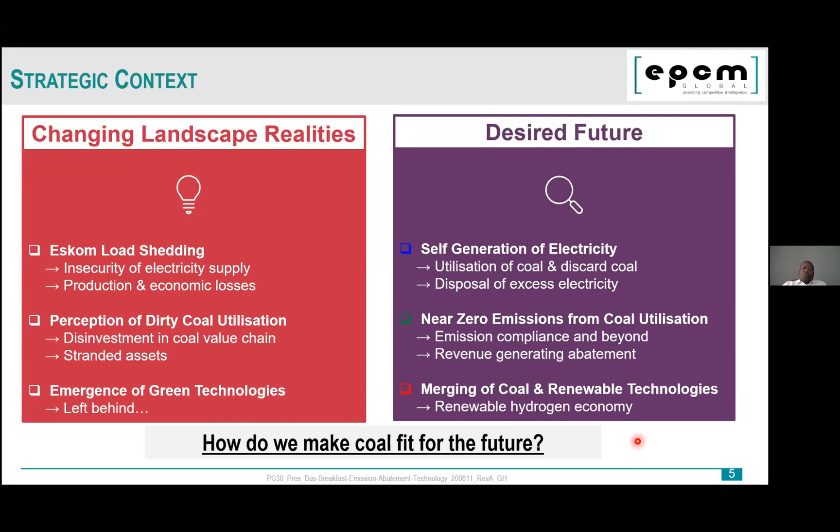And what we do is then we, from the cyclone scrubber, we start to deal with PM and PM 2.5, which is really the problem. It's the fine dust particles that come through your nose and land up in your lungs because your body does not have systems to manage those. So we scrub that all out in our cyclone scrubber.

We bring the flue gas to a cold temperature of below 60 degrees and we push it through our activated carbon. The advantage of this activated carbon is threefold. First, you have huge surface areas upon which the reaction can take place. Second, we can deal with a change in volume and concentration simultaneously. So where you typically have a startup of a boiler or a system where you burn, we can deal with the outflows—it does not change.

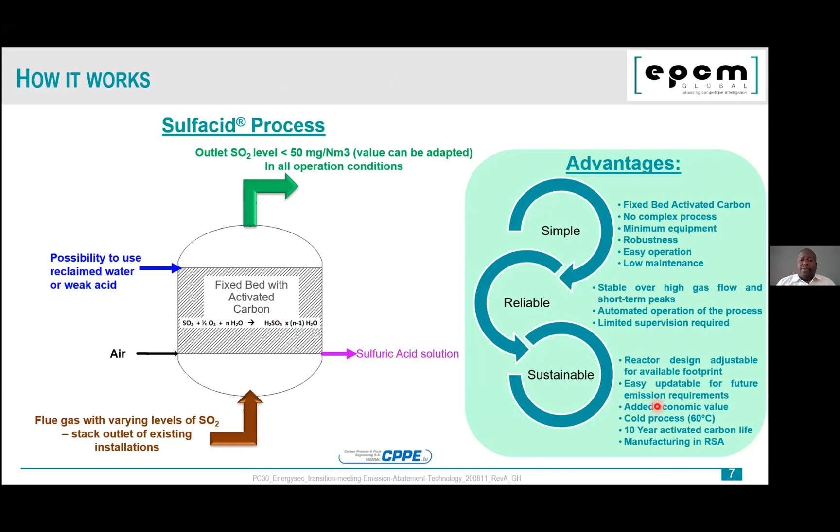So how does it work? In a typical power plant, let's say in Eskom, you would have your turbine there and then your generator, and the flue gas would then come through your fabric filters and out through your ID fan. That's where we do the installation, just before the flue stack. And then we push the clean air out by the flue stack.

We have two options, or more. The other option we have available is when we attain a zero carbon footprint, where we use green technologies to produce green ammonia, which is important in capturing the CO2. And then we convert all these chemicals into commodities—industrial commodities or agrarian commodities.

In many cases where you install this kind of technology, you end up with a scenario where you could be repurposing a site. So where typically a Hendrina—if we assume this was a Hendrina—all their discard coal, which they avoid burning because of the CO2 levels, are now available if you install a technology of this nature.

We use ammonia, green ammonia, to actually capture the CO2, and we then recycle it through the process. We then produce basically two or three sellables, which are the salts themselves—sellable ammonium bicarbonate or nitrate salts. We also produce sulfuric acid of various concentrations. The PM and heavy metals are typically taken away and put into a cement kiln, or the concentrations are leveled out as per industry requirements.

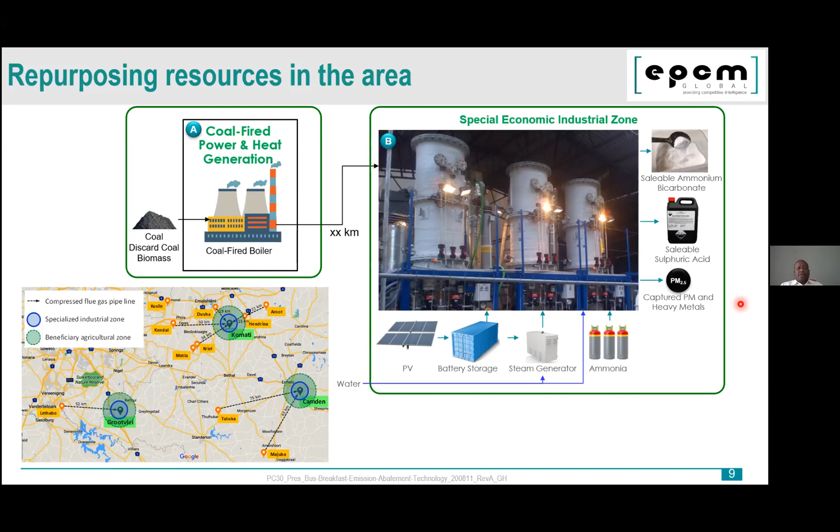In the case of NOx, we basically split the NOx into N2 and O2, and then release it into the environment, which is what we breathe on a daily basis.

As far as mercury is concerned, if there's a heavy mercury component, we install our Kombisorbon reactor, and that deals with the absorption of these heavy metals so that they can be extracted completely. The important bit is that every client tends to determine what they want out of the flue gas.

Within other industries, they tend to say, let's do the minimum. But what they don't realize is because these different reactors are stacked into one unit, it doesn't make a difference whether you do one now and then two years down the line you want to change the reconfiguration. I have to build a new plant.

But typically, if you tell us this is how I receive the environment, this is what I need to reach within a 20 or 30-year environment, we can build a plant that scrubs to that level.

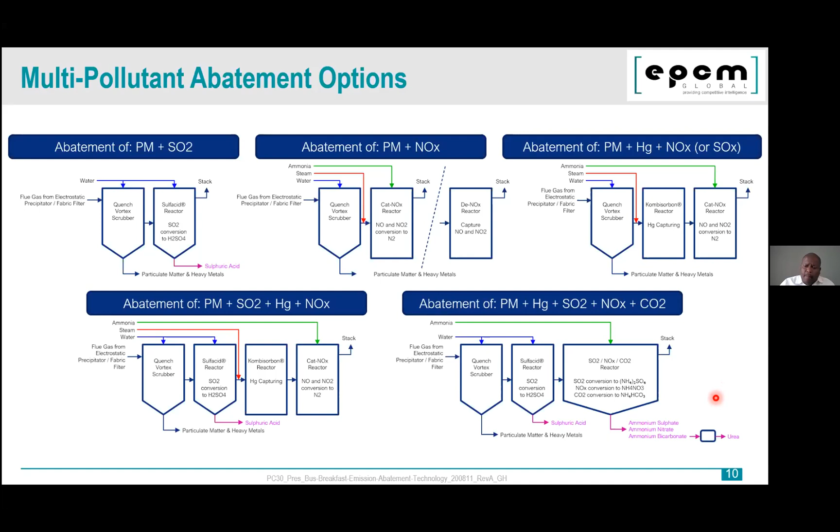So what does this mean? Typically, the other presenters have spoken that when you have SOx, you then have FGD, but they also don't mention that limestone with SOx creates more CO2. That's one system. And then you have the NOx, which you have low NOx burners to manage.

You have your ESPs to try and deal with the dust, but then you find sometimes there's difficulty with the ESPs, and then you add a bit of lime. So dust is more dust—it's the resulting equation.

And then the issue of capture and storage. I strongly believe that once you've captured the CO2, there are so many applications for CO2 that can fit into the circular economy, but no one is going to invest money in researching those until we are willing to go down that route. For example, some of the examples we have not spoken about today is that CO2 is consumed by algae. It's also consumed by plankton and can be a key feedstock for the ocean's economy.

And then we move on to H2S, which is typically found in refining industries, and that too can be scrubbed out specifically. Really, combustion usually deals with those three.

Now, why I'm talking about this is because these are separate plant installations, as opposed to what we have tried to do, which is integrate everything into a single unit and scrub everything and produce a sellable commodity.

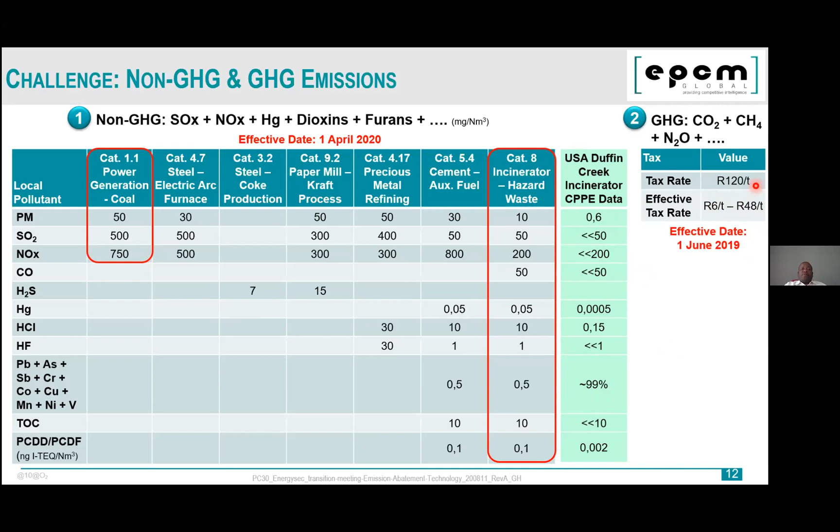Okay, so do we have demonstration plants? We have a number of demonstration plants. I'll touch on them.

In Africa, we have one in Morocco at OCP, and we scrub up to 98% because they use the sulfuric acid for their fertilizer manufacturing. We also have Codelco in Chile, they use our system, and they use the sulfuric acid for leaching the copper and curing some of the metals.

And then we have another plant in Jacksonville, which is a mint production plant. Again, we scrub to very low levels, and they also use their sulfuric acid. So you can turn the sulfuric acid into the business - for example, in Eskom, it can be used to demineralize the water, which drives the turbines.

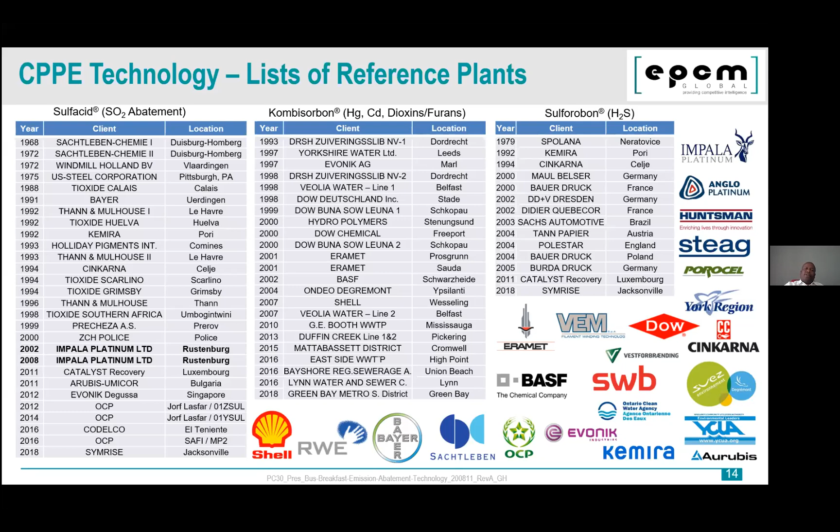Okay, just transition - how does this work? Nangi has spoken. There are particular industry requirements in the current sector. Yes sir, sorry to interrupt.

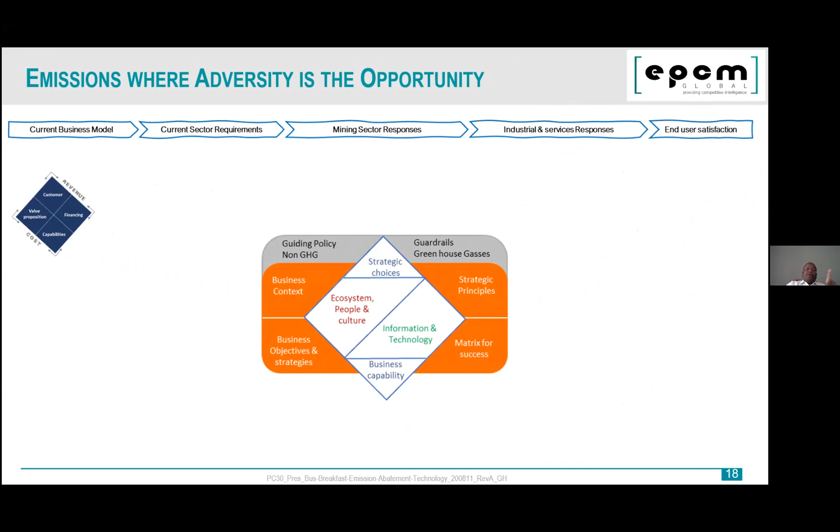And we look at your business value proposition - it's really based on financing and proposition versus your customers. We believe you can meet and manage both non-greenhouse gases and greenhouse gases by doing a number of things. So if you install our technology, which has a 30-year headroom, you then become compliant, and the equitable transition happens.

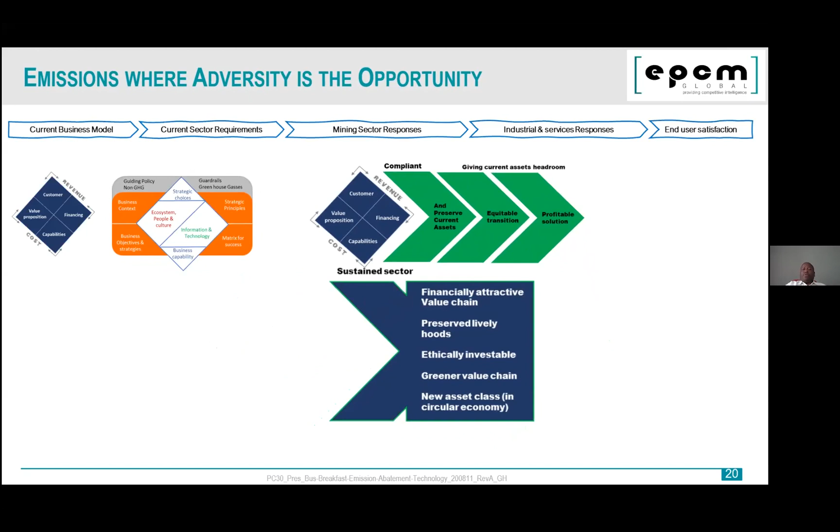In the sense that you don't have to change your systems or change your investments, it's a preservation of assets, but there's also sellables into the agrarian network, which makes it a profitable solution, and therefore makes you socially investable, which is one of the questions I saw. One of the key elements is that when we look at technology, it's performance, reliability, ease of use.

Then the price - if you consider what you're getting for the price, you might change your mind. And at the bottom is really that if we abate Eskom's issues and Sasol's issues, we can deal with job security issues, we can deal with job preservation, and I think that's what makes it an equitable transition.

Okay, we've spoken about this - I think the profitability. So what am I proposing? I'm proposing that the mining sector consider running an intervention on behalf of their clients, whether it's Sasol, whether it's Eskom - install a plant on their behalf, as we have done in the formulation with Eskom, and exchange it for a commercial arrangement. I think that's what makes the value chain affordable.

Besides this, I don't think the coal value chain is viable if the mining sector does not run an intervention. I think it's everybody's sector, and you can't rely on Eskom because they've been tripping on their own shoelaces. Thank you.

Other than the efficiency and safety factors that modernization brings, the human factor is quite critical. Modernization brings with it serious implications around the nature and structure of employment within the mining industry, especially when it comes to the quality and quantum of skills required.

Some of you will know that in places such as Australia, especially around the Pilbara area, which is the iron ore area, quite a number of trucks there have become autonomous. They are operated by some chaps sitting far away from the mine, using a joystick and operating trucks right in the middle of the pit.

So the quality of skills is very, very different from your general worker that you find in a coal mine in Emalahleni. And the quantum of skills required is also very different, because that chap with a joystick could be operating 5 trucks, 10 trucks at the same time, rather than having 10 truck drivers.

So we need to really understand the requirements for all of the processes that are closely associated with modernization. We need to understand which skills we need to identify and how to nurture those skills.

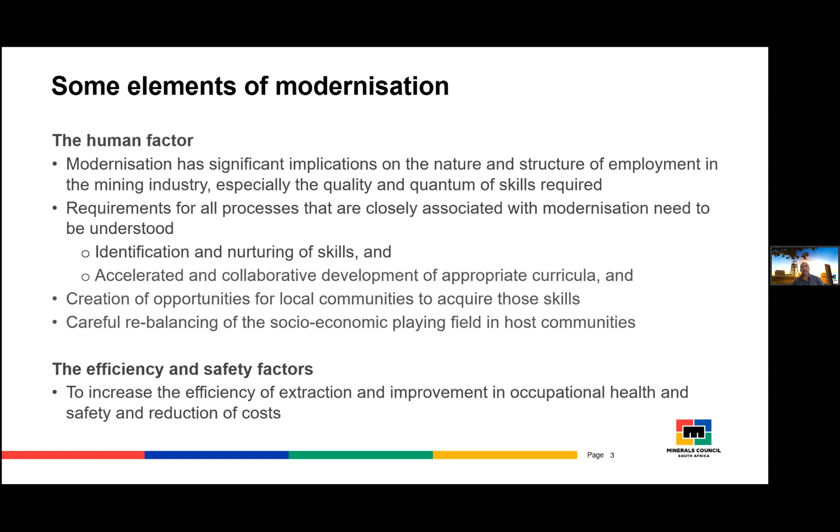So what do we need to do? In my view, we need to look at the redevelopment and transformation of the energy economy that prevails in these mining areas, coal mining areas, into something that is a lot more dynamic, diversified, and inclusive. And again, what is inclusive? These are the things that we need to be dealing with.

We could import the technologies that we require, but as Davis Cook earlier said, the systemic solutions are the ones that have got longer lasting impacts. So to modernize, we'll be better off ensuring that we develop those manufacturing capabilities to support local modernization efforts, so that we lower the cost of mining by not importing, and then the balance of payments also becomes an issue on a national scale.

We would also see lower economic growth if we don't develop those manufacturing capabilities. And obviously, we will not see much in terms of diversification. We will not do well in reducing unemployment. So we will, in fact, reduce employment rather than ensure that with modernization, we create more opportunities over a longer period of time. And also the issue then of fewer local portable skills.

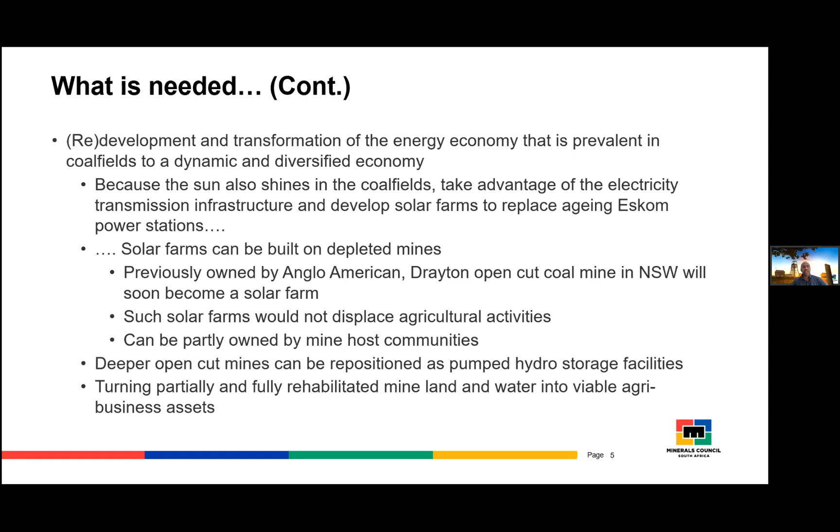So the last one that I really want to talk about might be a bit controversial, so our regulator will excuse me on this one, but I think we need a radical shift when it comes to mine community development. As we continue to modernize, we have responsibilities around mine community development. I think we need to encourage government to carry out its constitutional mandate when it comes to social infrastructure, schools, clinics, roads, job creation even. Government needs to play its part a lot more effectively.

That would give us space as an industry, especially when we are able to create value propositions that encourage us to participate in both upstream and downstream mining industrial activities. Mining companies used to be conglomerates in the past, and now we talk about core business. So if you're Julie Lovo at Anglo Coal, core business is mining. Anything upstream or downstream, we largely don't get involved in. But I think we could create those value propositions, and some of the presenters have alluded to this domain, around things we as an industry could do.

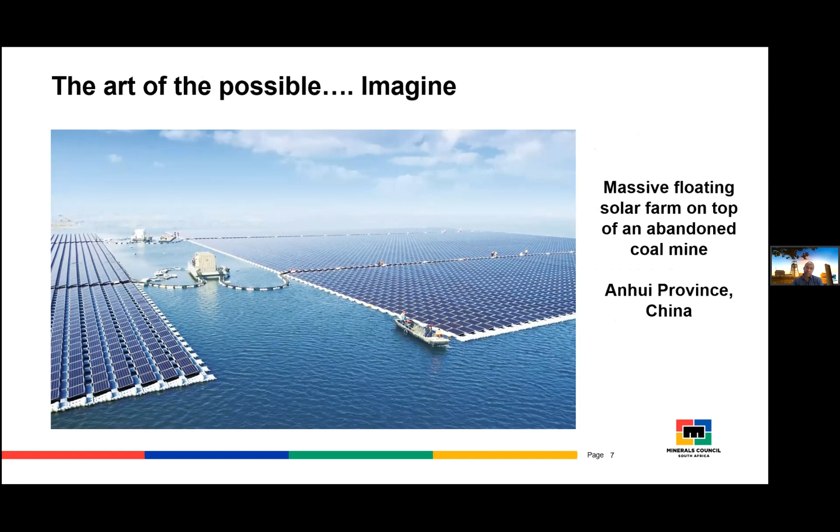So going forward, I just want to leave you with two slides. It's all around imagining a new future. This is a floating solar farm on an abandoned coal mine in Anhui province in China. I'm partial to China because I did live there for two years, but it is possible to repurpose a coal mine. The other one is not a coal mine, but it's a quarry just outside of Shanghai in Songjiang. It's a 5-star hotel built on an old disused quarry.

Again, it is all about imagining the art of the possible and saying, how do we get there? But you can't get there by picking on a single item to do or to follow. It's got to be systematic. We've got to be in it, and everyone who's in it has got to have some skin in the game. On that note, I would like to leave it there, and we'll be happy to answer some questions later. Next, thank you.